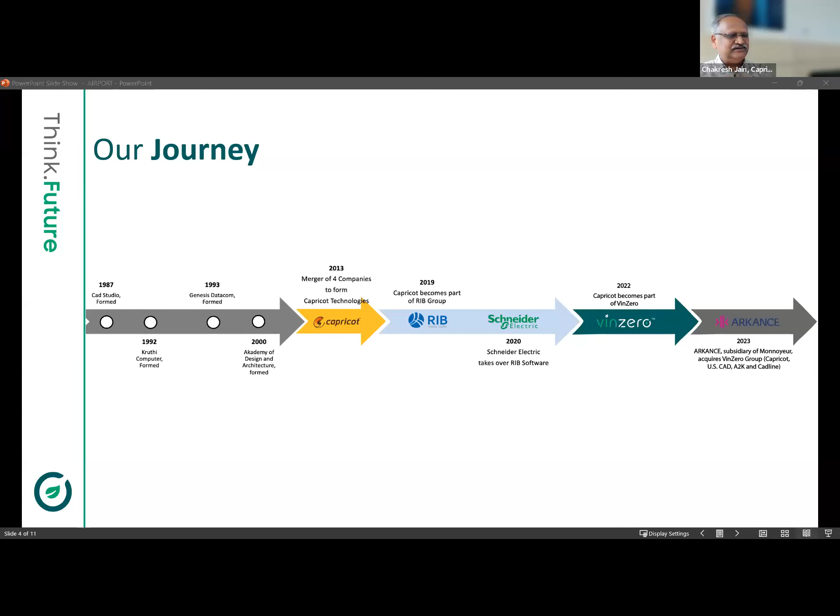But the fortunate thing has been that we have now become a part of a global group, ARKANCE, with presence in 18 countries across the world, serving customers like yourself with Autodesk technology with a very specific focus on the architecture and construction industry. So today, as an organization, we have reorganized ourselves into three separate geographical locations: Americas, EMEA, and APAC, to serve you better. Farhad, if we can go to the next slide.

As an organization, of course, we know today digitization is something very critical for this entire construction industry, and I'm sure our speakers will be talking about that in more detail. That's where our role and responsibility is, to help you use digitization and leverage it for improving your design and serving your customers better. That's our primary role today. Without getting into too much detail, just one more slide.

Today we are serving customers like yourself from 50 different locations across the world in 18 countries, with more than 40,000 customers. On the right side, you can see how we are organized. Monnoyeur, a French group, is the owner of all this organization, and under VinZero we are present. So we can claim ourselves to be one of the largest partners of Autodesk across the world; there are very few such organizations serving the construction industry. That's what we pride ourselves on.

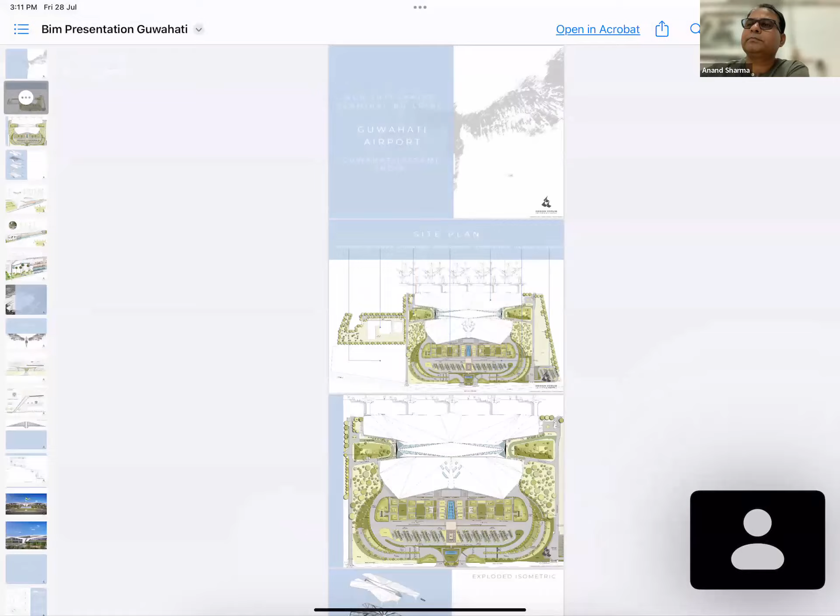I hope my screen is visible to everybody. Yes, sir. All right. So as architects, I'm no BIM specialist. Let me be upfront and very candid about it. I'm a user of BIM, and I would illustrate the kind of complexity that one can handle using BIM as a platform via a project of ours that we've been fortunate to be a part of.

You will pardon a little background noise around me because I had a whole day of site visits scheduled today, and I'm still sitting on a site while I'm doing this webinar. But Chakresh asked me to be a part of this webinar, and Chakresh is one of those people I cannot say no to. Other than being the stalwart in the industry that he is, he's also senior from my college. So of course, that special link is definitely there.

So I'm going to talk about the new integrated terminal building for Guwahati Airport in Assam, for which we were designers, architects in association with AECOM. I will quickly give you a flavor of the complexity involved in the design of the terminal building. And without showing you the drawings that get extracted from BIM, because you all are very experienced, I would take you through a small Navisworks walkthrough using the platform that we had created.

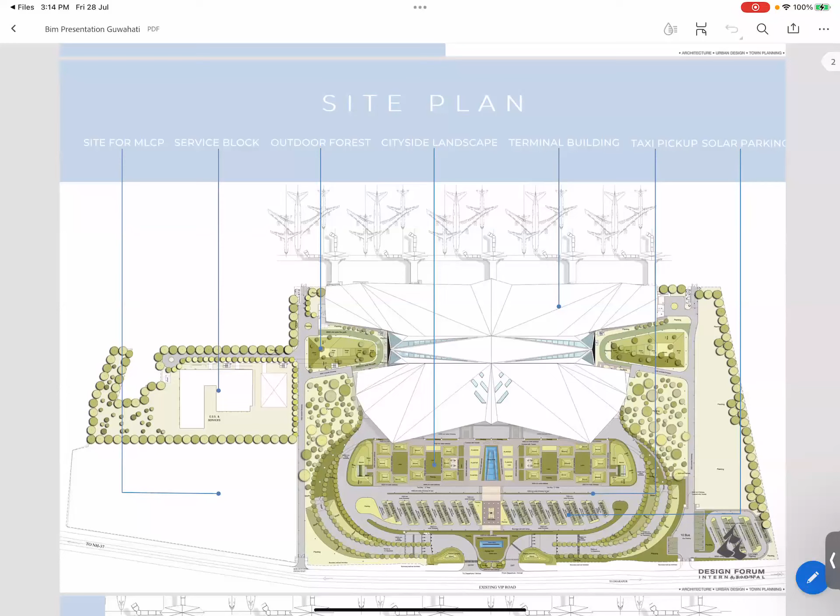There is a lot of intricate design intervention in the terminal building, all of which I will take you briefly through. In airport parlance, there is what we call the city side landscape, the terminal building and the air side. And there, of course, are the services and related paraphernalia, but we will primarily focus on the terminal building. The terminal building has a very unique origami-inspired terminal roof. You can see the bird's eye level plan of the terminal roof, and the landscape in front of it.

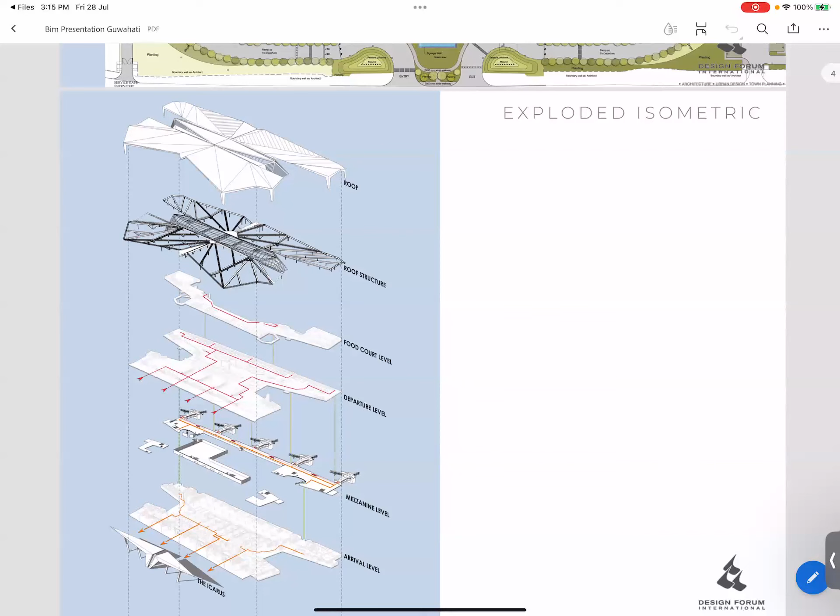If I was to explain the way the building has been modeled, there is an exploded isometric that you can see. There are 5 levels to the building. There is the arrival level, there is the mezzanine, which is primarily for passenger movement from airports down to arrival and so on. The departure level, and then there is a food court level on top of it, which is the 4th level. And the final and most complicated level is the roof structure that you'd see on level 5. And then, of course, the envelope of the roof over there.

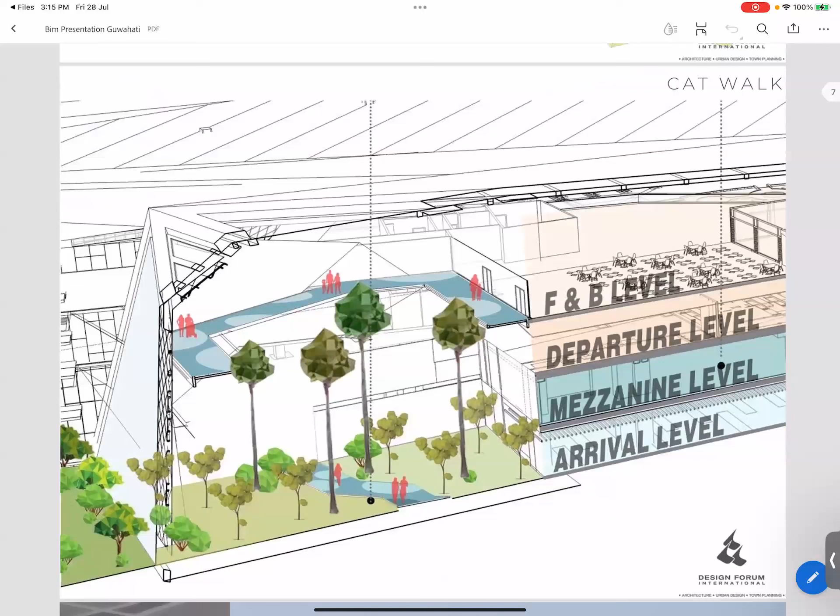So one clear design thought, or rather a chain of design that we were very, very conscious about weaving the entire design through, is origami. It is a craft that all of us have sort of practiced in our childhood. We use that craft to create many things in our building, including what we are calling the Icarus.

For the uninitiated, Icarus is the mythological Greek figure, the first person who had dared to fly using wings glued with wax to his body, and he jumped off a cliff. And the aspiration soared high. Unfortunately, the person did not, but at least the aspiration of soaring high was definitely there.

To give you a sense of Icarus, it is 180 meters long and can take almost 13 full-length buses, length to length. So it's a massive structure, as you can see, supported at just 4 levels. It's an engineering marvel all by itself. It rises 26.5 meters from the ground, and it spans primarily over the departure concourse, and you can see the canopy spreading over the departure concourse.

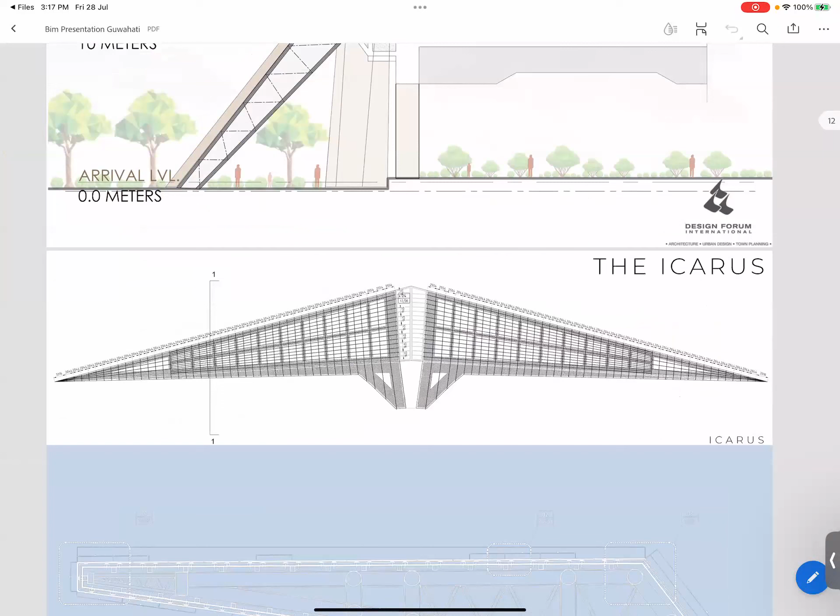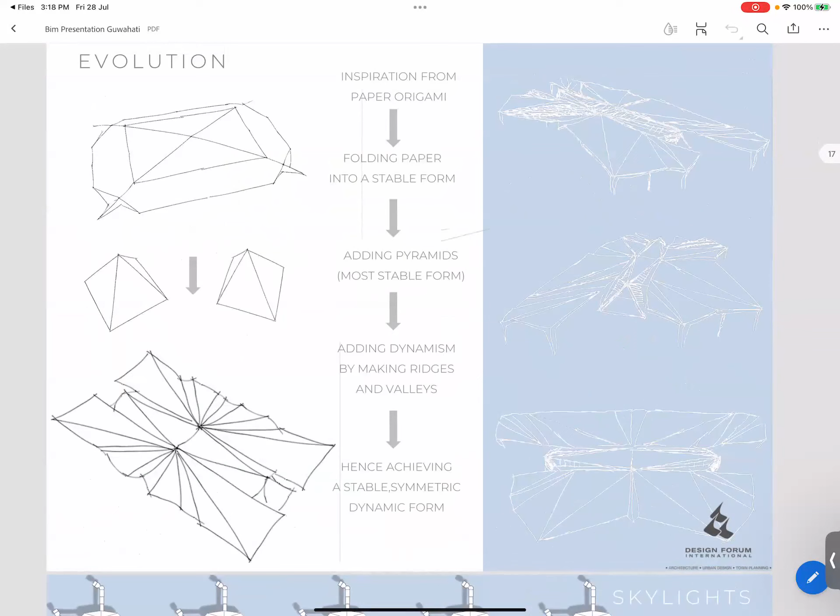The origami roof. So we started off with creating a plain rectangle and trying to bring some corners to it. We tried adding pyramids to the sides to bring stability to the form. And then we ended up having a little more fun, making ridges and valleys from the roof. And eventually the result is what it is. It's complicated, but it is also very, very symmetrical and very, very interesting.

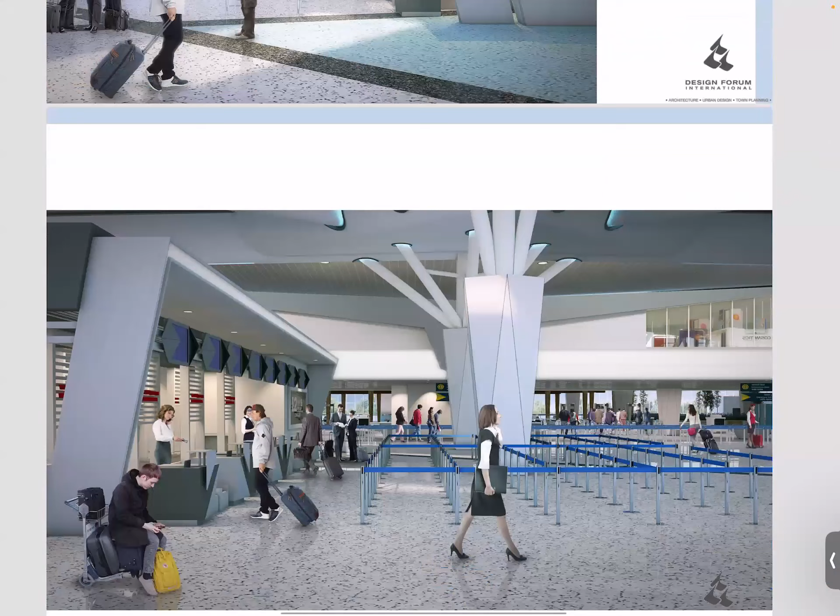The trusses: because of the complicated structure that we had, it was only possible using BIM to actually model the structural supports of this. You can see the complication of too many trusses coming into one diaphragm kind of a truss, like a plenum kind of a truss, and all the loads getting transferred onto it.

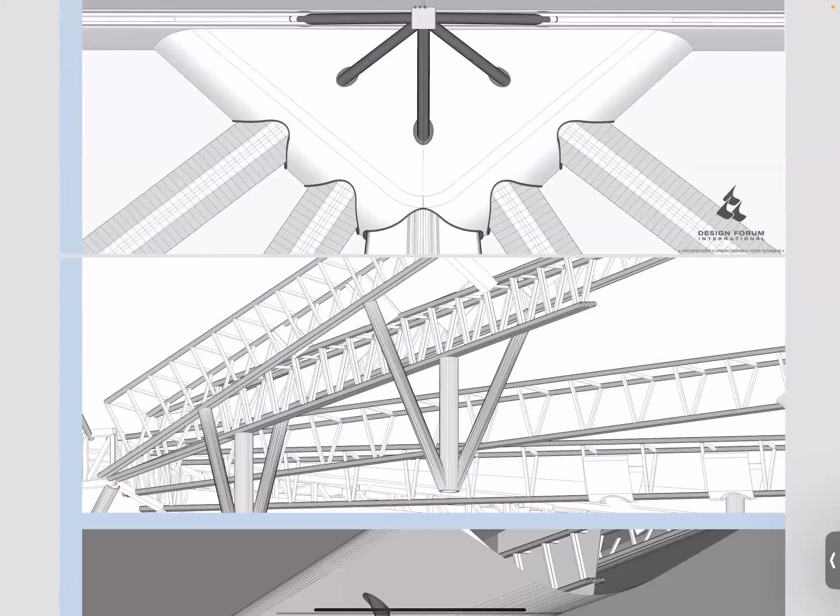And because we were modeling it all in BIM, we could actually work out the profile of the cladding that is eventually going to be put on top of these trusses, and determine the exact shapes, the exact curves, the exact curvature needed, and the length of the sheets to cover a complicated structure like that. And these two images, top and bottom, give you an idea of what the trusses are and how the trusses have been treated using a visualization and working drawings generation tool like BIM.

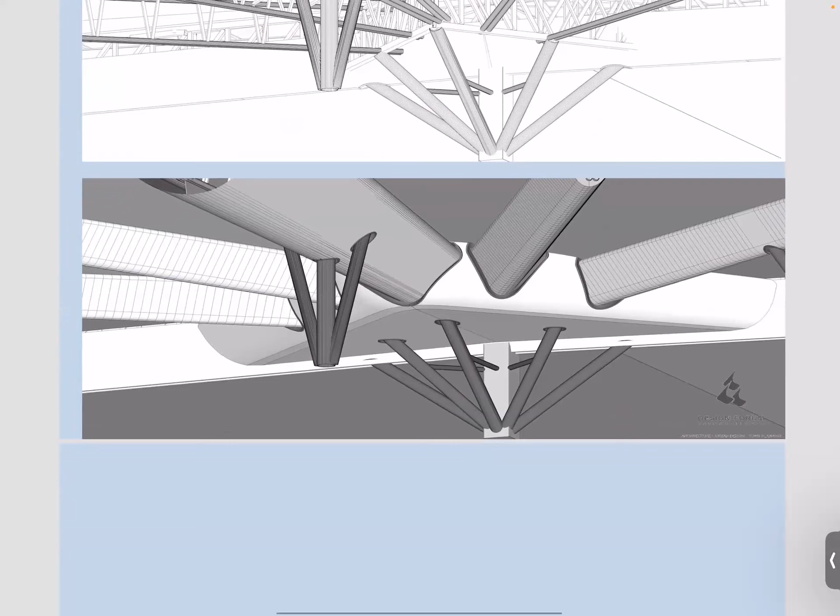Some more shots. And then there is the indoor forest that I was telling you about. It essentially is a transition point from the arrival atrium via an indoor forest onto the baggage collection. And it is located on the extreme sides of the terminal. It is a pyramid, and therefore to join a pyramid into a complicated roof like that meant a lot of intricacy and a lot of three-dimensional thinking. Of course, BIM made it easy for us.

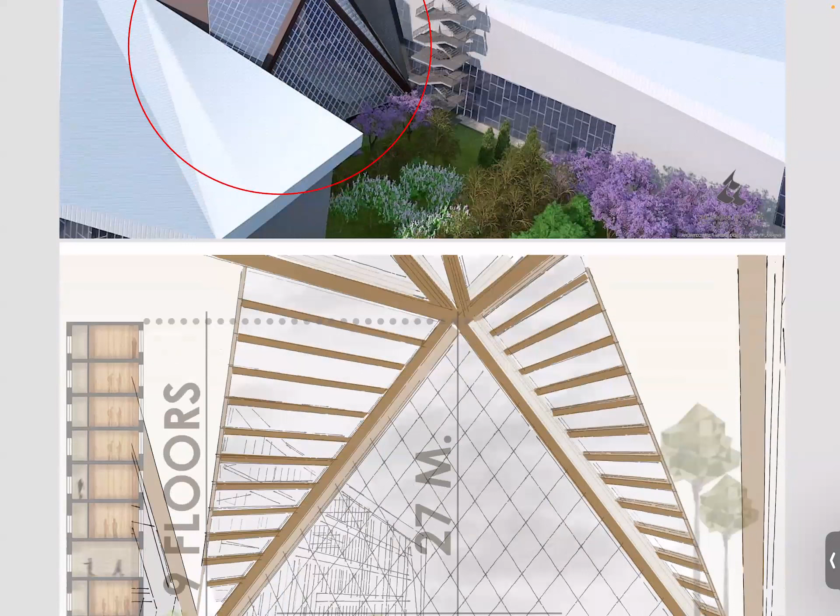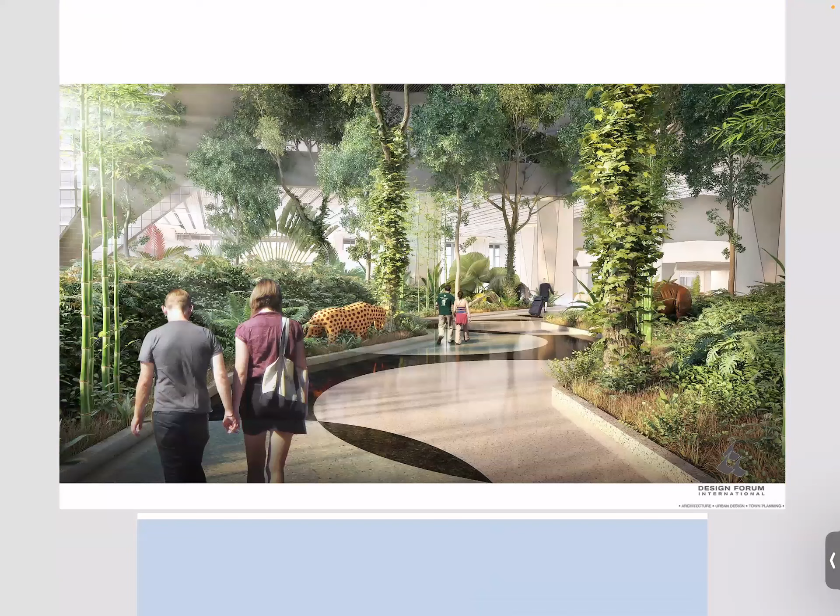Just to give you a sense, this arrival atrium, this indoor forest pyramid is 27 meters high, equivalent to roughly 9 floors. So you can see a massive glass-clad structure, and that is the internal impact of that pyramid that the passenger will experience walking through the indoor forest over here. We are actually planting shade-loving indoor plants, and because there is abundance of sunlight coming into this, the experience is very, very surreal.

I do not want to bore you taking you through the drawings that were extracted out of them. You guys are all stalwarts. You understand. It would be, I think, sufficient to say that all the GFCs that were issued to the contractors were derived and were extracted from the BIM model.

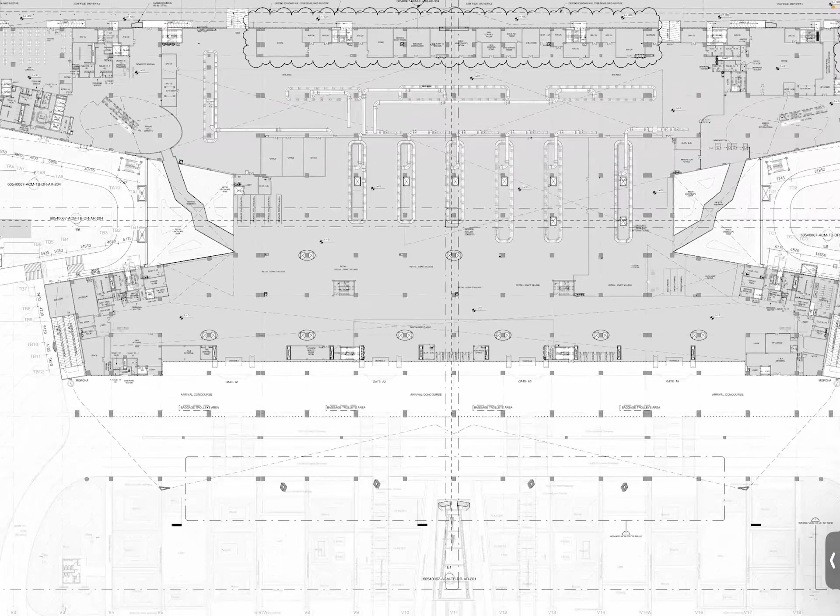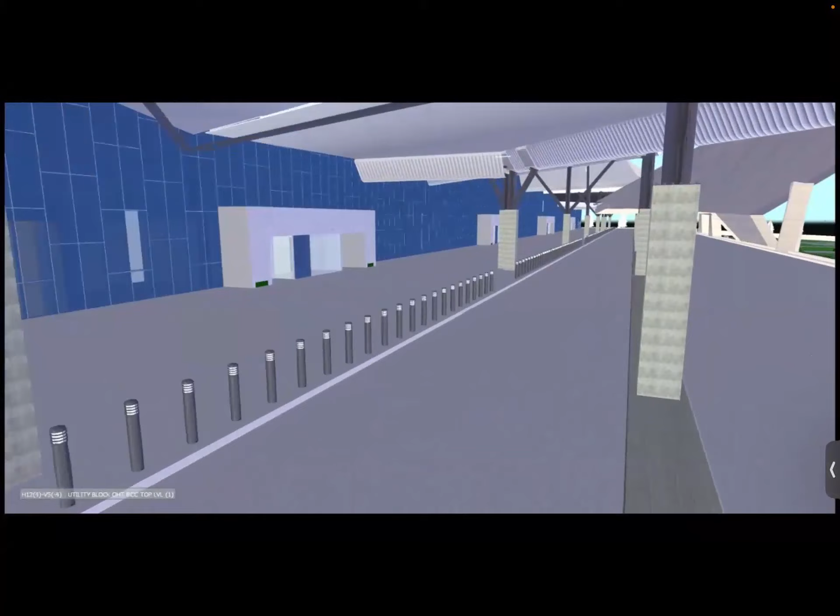Our client at that time, Airports Authority of India. The project has now incidentally moved on to Adani, but our client at that time, Airports Authority of India, insisted that GFCs were made out of BIM. So I will hang back there and walk you through that. So this is the entire model created, resolved through Navisworks in our consultation and in coordination with our project partners, AECOM. And it's a 4-minute video.

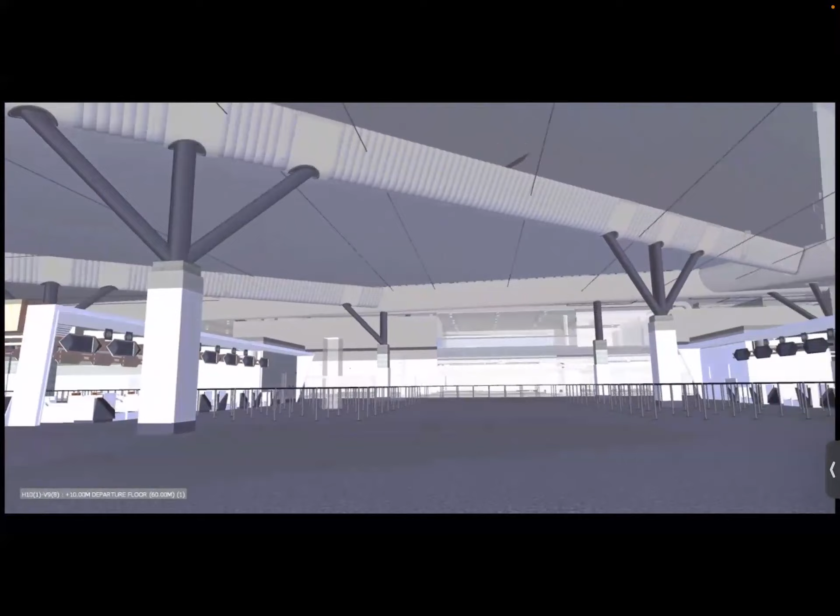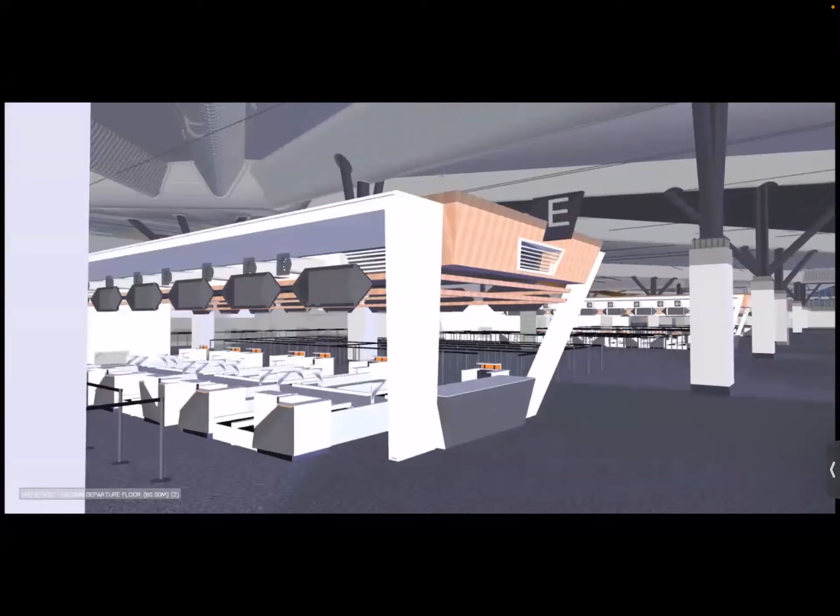Please bear with me. The intent is to show that all the finishing, the truss treatments, the interiors, the flooring, the wall treatments, even the baggage system that you will see in a moment, the check-in islands, the screens, every part of the facade, the design, the interiors, the systems, everything down to the last things such as queue managers, we modeled in BIM. It was possible to do it.

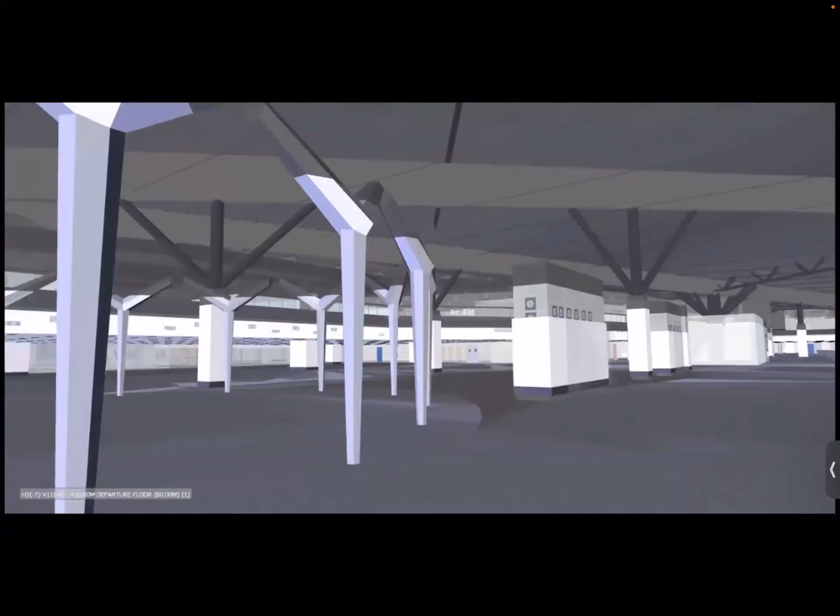It's an extremely complicated design, but it was possible, and we made sure that every single design, even the furniture, you can see the facade, the gates towards the airside for passenger boarding bridges. It was possible, and the versatility of the platform gave us the latitude and gave us the freedom to do it. This is the departure floor, as you can see. There is a crafts village that was envisaged as part of the secure building area for the airport. So this portion is all at the departure level at plus 10 meters.

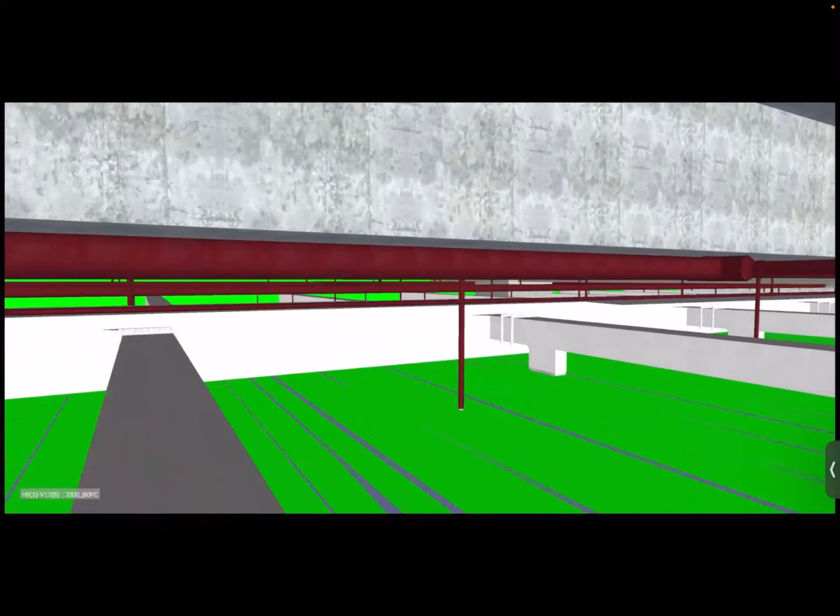We would quickly run to the food level and then to the arrival level. This is the arrival level. You can see the baggage reclaim devices, the false ceiling, the baggage reclaim hall, the baggage collection hall, the services running on top of it, the structural system, the sprinklers, the upright and pendant, the ventilation system, even the false ceiling system is very, very visible. We would also take you through the baggage handling area, and you will see that the versatility of the platform afforded us the chance to be able to do all that.

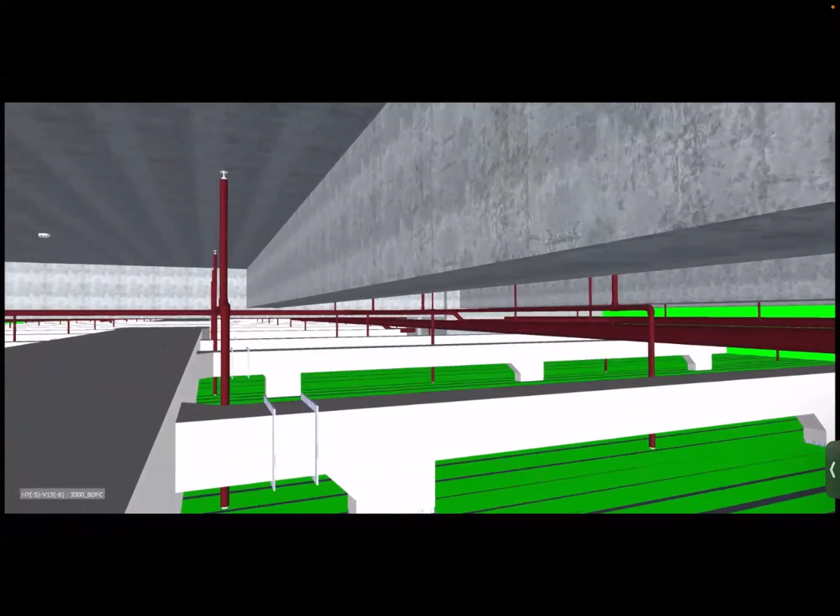So these are the areas where the baggage is coming from the level above. This is the mezzanine back of the house area. Nobody ever sees this area. This is where the baggage is coming from the check-in islands to a level where all security checks are happening. There are huge luggage conveyor belts. There are CTX machines through which baggage passes. So inline baggage screening system, as they call it in aviation terminology these days, is what happens behind the scenes.

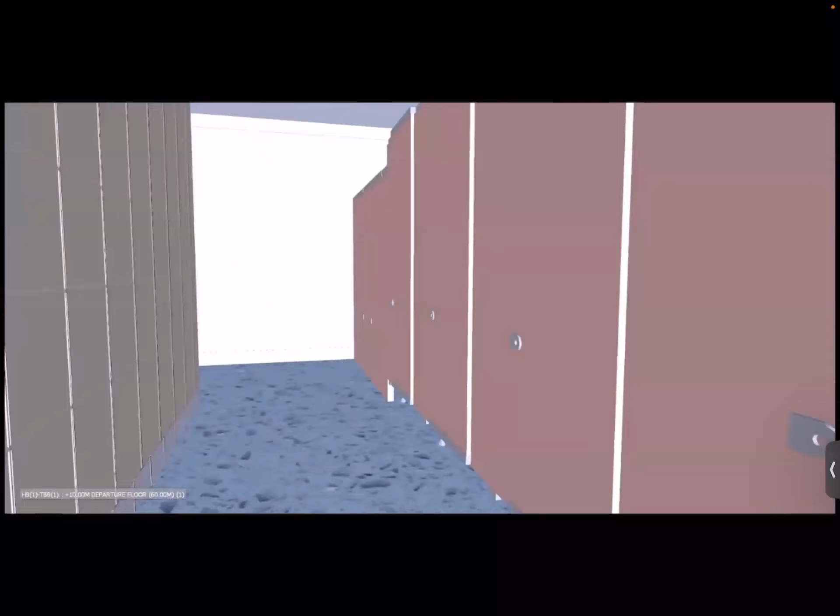Then there are sections running through toilets and plumbing shafts and everything. The power of the platform, down to being able to detail the unions, down to detailing the diameters of the pipes, coordination of the shafts, overlaying of various services within the shafts. It was all possible, and we went down to that detail. You can see even each and every bend, each and every union has been captured. All the P-traps, the S-traps, all the plumbing system.

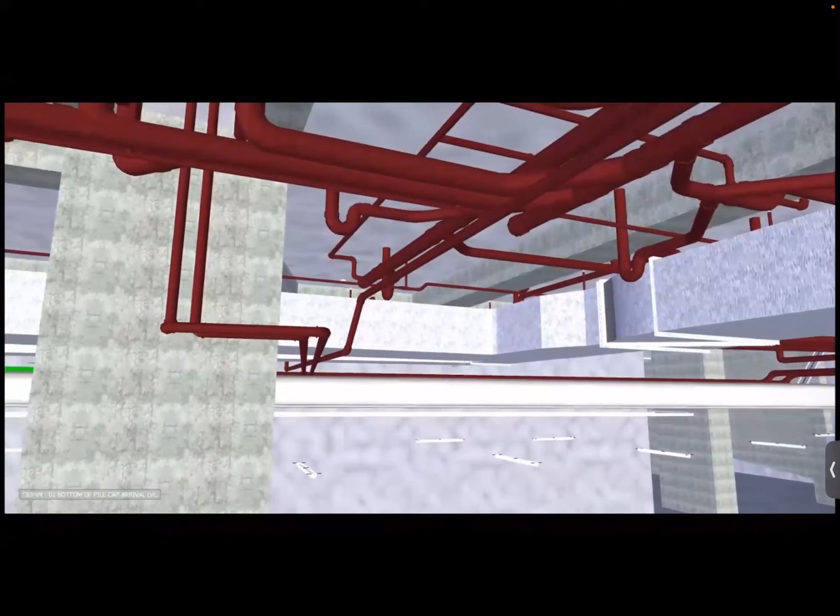Baggage handling system, incidentally, is the most complicated services part of an airport. And if it was possible to model that, everything else was, so even the piles, the structure. This is the structure getting cut sectionally from back towards the rear, and you can see all the components of the building getting very, very clearly reflected in this animation and this video. So it was conceptualized and then eventually delivered in BIM. So that's about it.

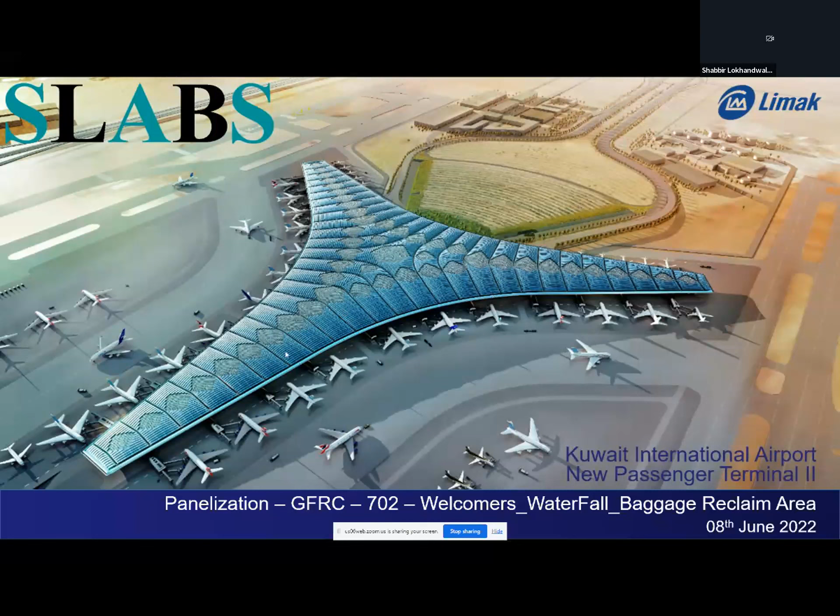Roughly to tell you, the entire project is about a $10 billion project located in the heart of Kuwait. It's one of the largest ongoing projects in the Middle East right now. The size of Kuwait International Airport is roughly 38 square kilometers. That's the entire scale of the project. What I would like to showcase to you is one part as a case study of this entire project and how we resolved it using BIM.

So, as I think our previous speakers have told, there's several areas in the airport like welcomers area, baggage reclaim area, etc. So, in one of the areas, let's say welcomers area, we had doubly curvature panels. So these were all parametrically modeled, and the meshing and massing was done, also to make the panels production friendly, erection friendly, and so on.

So without BIM in place, this would have not been possible if we would have considered the traditional approach of construction. Along with this, we had to do integration with services like sprinkler, alarm system, HVAC, and other services, and do the clash detection as well using Navisworks software. So all these were enabled using only the BIM platform.

And I would say that more than 100 agencies were working across the globe to develop this entire BIM model for the entire airport. Some agencies were working on HVAC, fire alarm, some were working on the glass cladding, some were working on the actual structure. Arup was the principal structural consultant. So there were multiple agencies working on this project since 2017 till date. And till now also the project model is being uploaded and rigorously done.

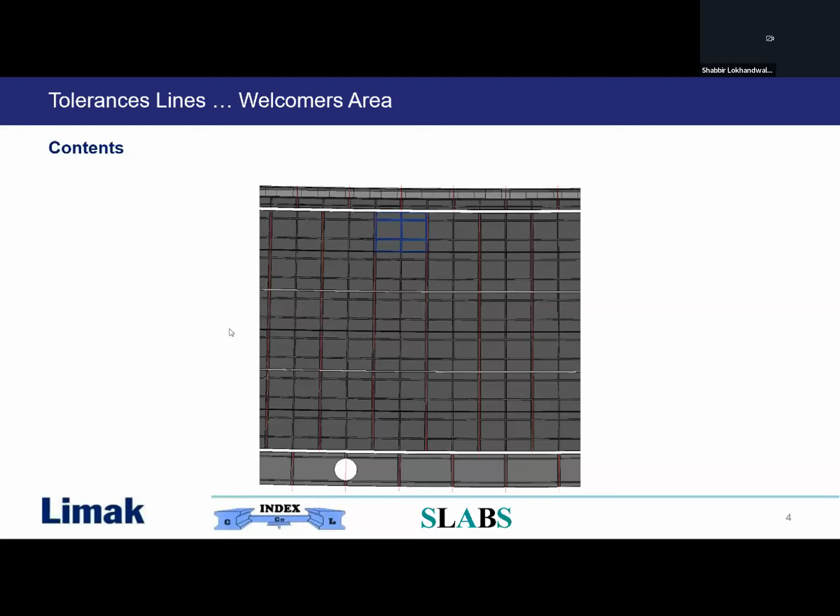So this is the scale of the project which could also be done in BIM, and this is completely done using BIM. So this is how the section looked like, and we had to ensure we maintain the gaps between the panels to align the services, etc. There was not even plus or minus 2 margin we had to play with the construction tolerances and the design tolerances, so that the panels could actually fit in the exact locations once they're constructed.

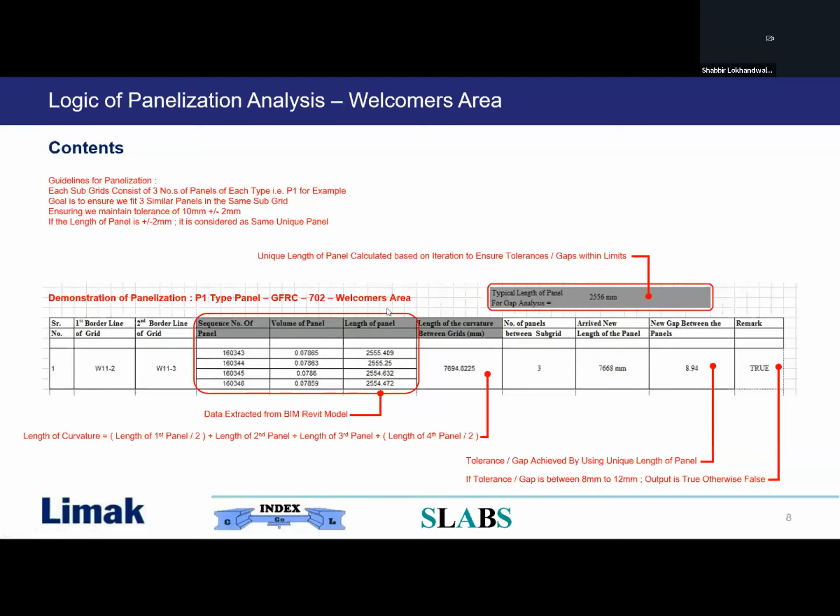Then we did the structural engineering analysis and design based on the spanning, etc. Then we had to do some sequencing, panel numbering, the analysis of the panels. So all the core data was extracted from the BIM model, and for one such area, this is how we arrived at the pattern of the panels, the way we'll hang the panels, how we'll increase the repeatability of the panels, how it'll look, because this is a main attraction at the arrivals gate when people are entering the airport. It's called the welcomers area. So this is how the entire summary of that area was done.

And then based on our design of panels, the secondary steel structure was also defined to hang these panels. The secondary steel structure was again hanging on the primary structure to cater the loads of these panels in GFRC and precast the way we had designed.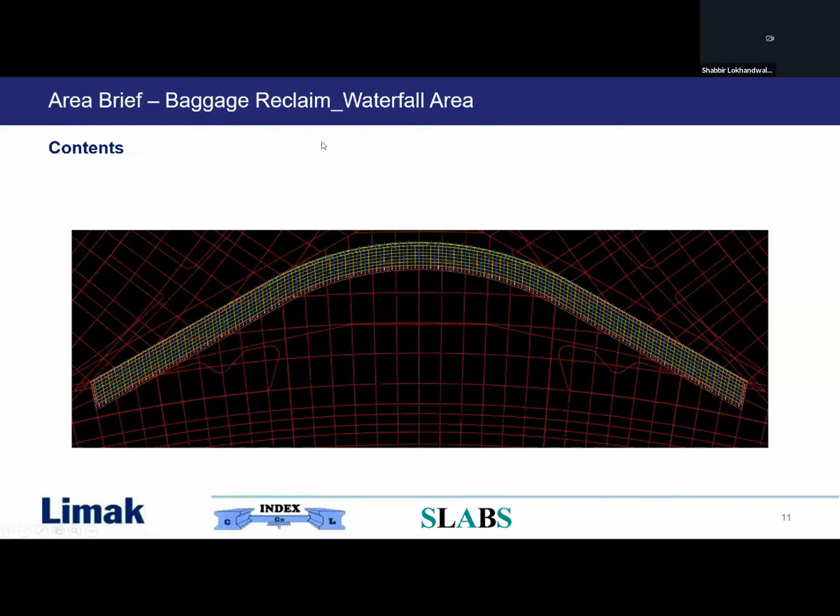So here also we have to define the gaps to be followed to allow the services, light fixtures in between, etc. And there was a particular line or groove which had to be considered, the architect's vision. Fosters and Partners were the architects, and we had to get the approvals in order to get it finalized, the way we are breaking the panels, how it will look like, etc.

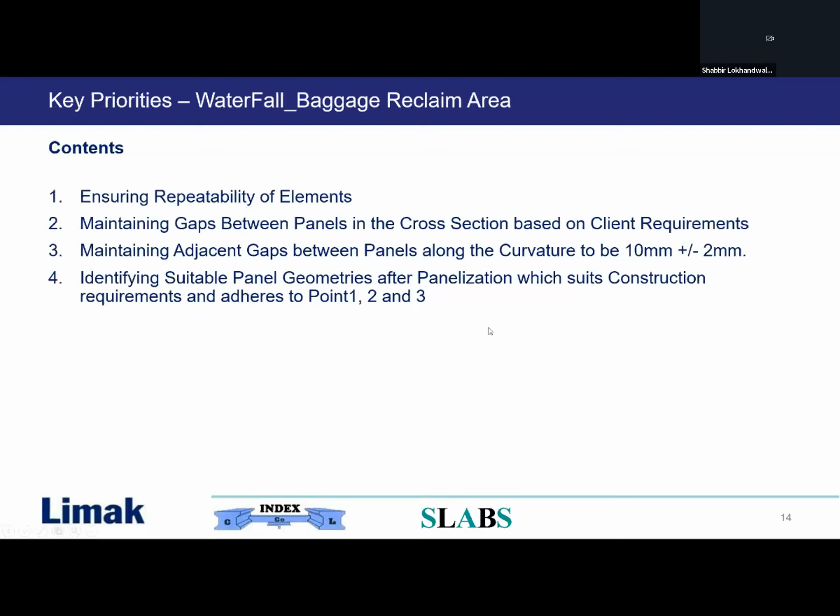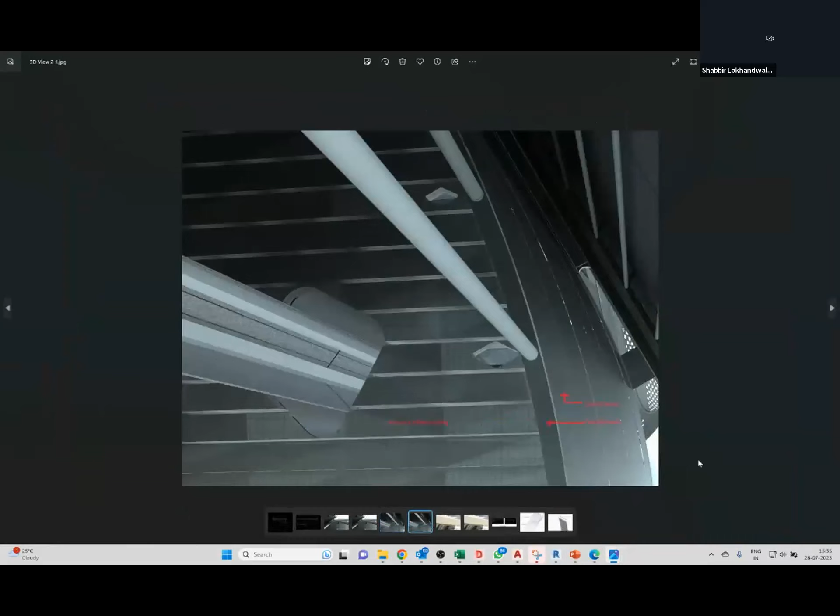Now, I would like to just showcase you the real outputs. So these are some of the 3D views which we have captured using Navisworks, once we superimposed our models and did the review of how the grooves will come, along with the other services and stuff like that. These are some of the views from Navisworks, just to understand from the bottom how the panels will look like, how the grooves will look like, etc. So this allowed the architects to understand with clarity how the final desired vision would look like.

Okay, fine. Now I would just like to show you some of the output results also, so that you appreciate the integration of BIM on a given project. So once we have generated a 3D model, there were more than 25,000 panels, and more than 2,000 drawings to be extracted. So it's a humongous amount of task.

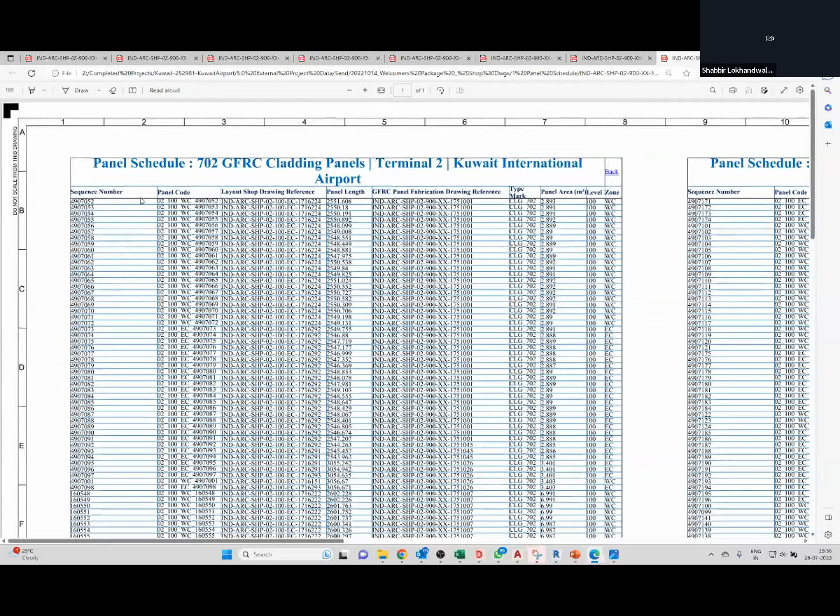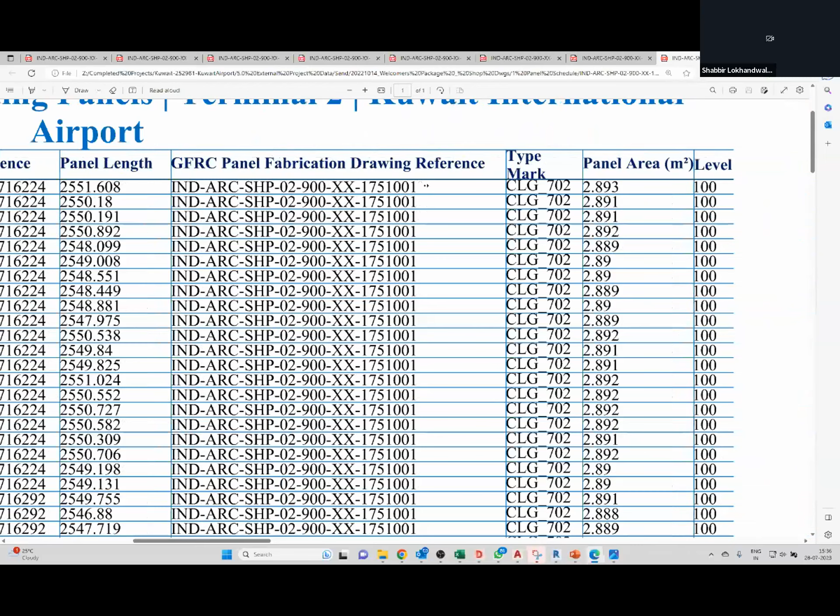You can see the panel schedule, wherein we have a particular unique ID number given to a panel in the BIM model. Then we generate a particular drawing, and then it is automatically programmed in Revit, which tells the production team to refer to this drawing to produce that panel, mentioning its exact length, which fabrication drawing to refer to, which erection drawing to refer to, the panel area and the zone in which that panel is coming, etc.

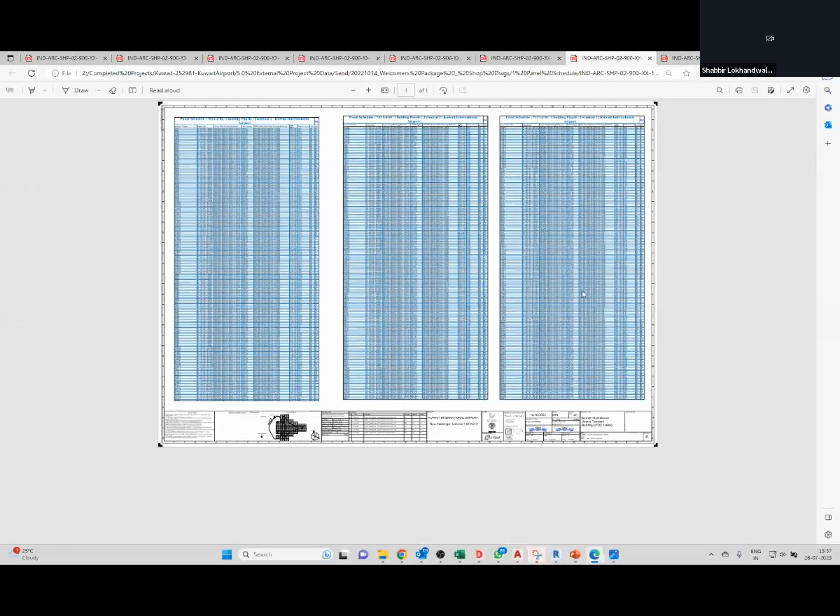You can see the panel schedule, which is entirely derived from Revit, from the BIM model. So this is one such fine example. So I'm just taking you in the backward direction. This is the entire panel schedule obtained from our BIM model in Revit.

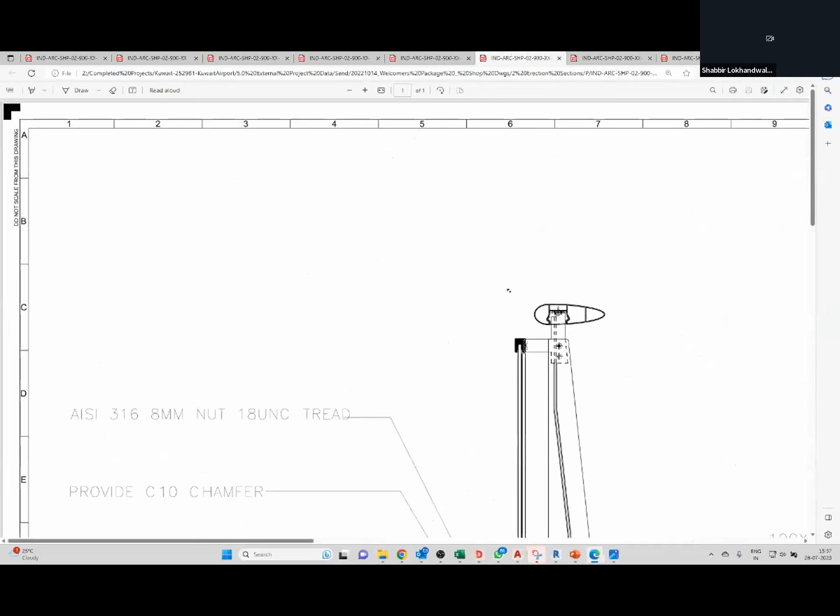Then these are some sections, connection details of the GFRC panels and how to maintain the gaps for the services. These are ribs and returns with the chamfers, with the secondary support, with the primary support. Then we had some balustrades, how to treat those local joints, etc. This is completely done by coordinating with other services and structural models to arrive at the entire BIM model of cladding.

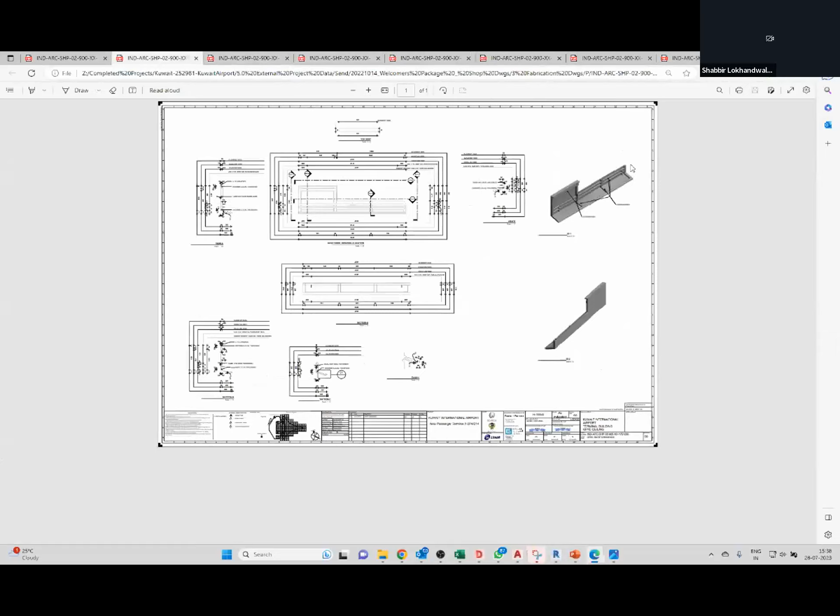There's a full section of the panels with connecting frames, primary, secondary, etc. So these drawings are also extracted from the BIM model. Another typical connection detail of other junctions. Then this is a shop drawing. Now for every panel we have to produce a drawing so that it goes to the production team and then it is erected.

So with detailed connections modeled into the panel with the ribs, returns, cutouts, and the exact panel dimensions. Please note that we cannot deviate more than plus or minus 2 mm at the production level. Okay, so that precise. The panels were actually extracted from the Revit model and the drawings were also created using Revit only. So nothing was done on a 2D platform like AutoCAD. Everything was seamlessly modeled, generated, clash detections done, and the drawings were extracted.

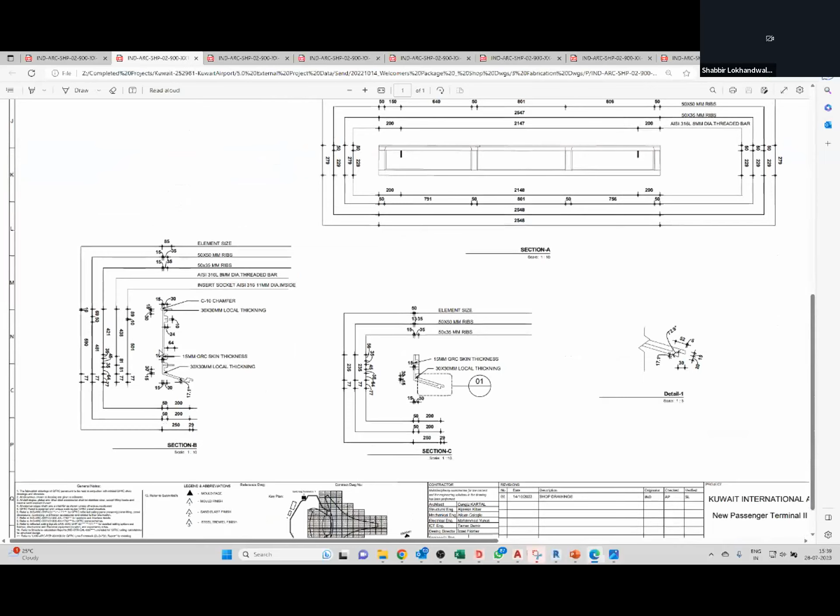Definitely for FEM analysis, etc., and parametric modeling, we have used other programming tools and software as well. And so these are finer level details, up to the fabrication level drawings, which we have extracted from Revit. Okay, so this is another complex panel which I'm showing to you right now. So you can see the connecting bars, threaded bars coming out of the panel, everything modeled into the model and drawings being extracted. Okay, so just a minute.

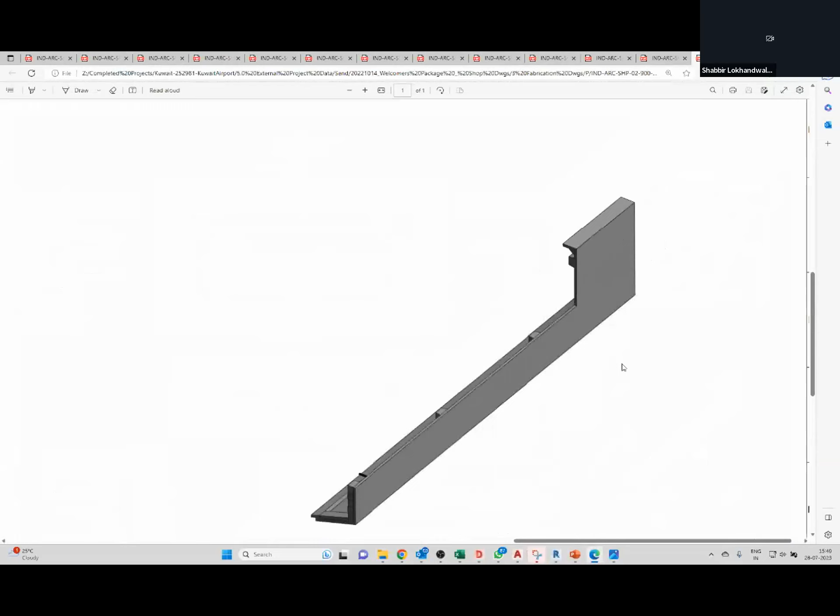So these 3D views also make very clear to the production team how the shape of the panel would look. Unlike 2D, where they have to visualize how the panel will come out in 3D, once we give a 3D view in the shop drawing, it's very easy for them to follow the drawings and make fewer mistakes. So that's the power of BIM, which we got to utilize for this particular project.

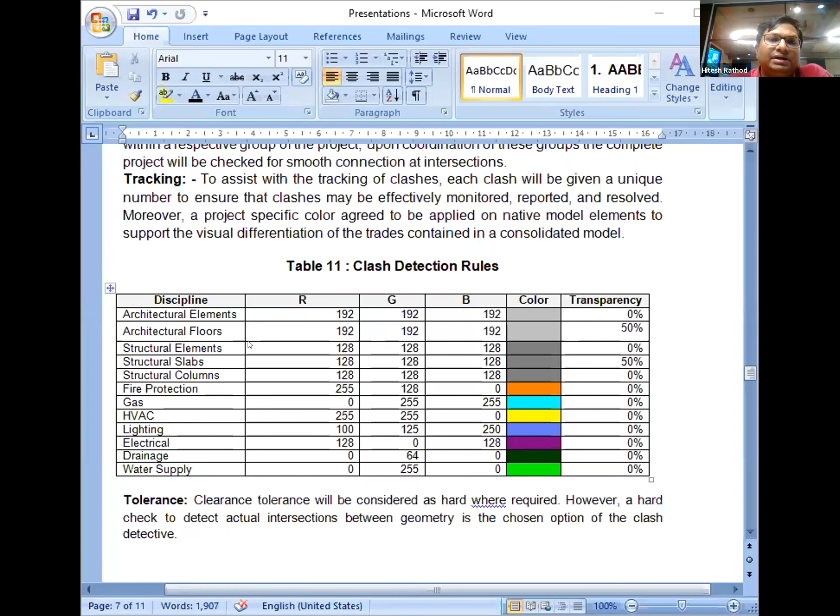Okay, so actually I have developed in-house clash detection rules and tolerances. So for architectural elements and floors, structure elements, slab, columns, fire protection, whether it is going to be wet utility or dry utility, lighting, drainage, or water supplies, we can develop rules as per this table, and we can provide the transparency with the tolerance this way.

Wait for a second. What is happening?

What is the clash detection coordination cycle? Along with the BIM meeting, there are various actions to be taken on a daily basis. The actual day and item will be confirmed, but the following cycle is intended to be followed. Mentioned tasks must be completed before the coordination meeting. So when you have the meeting with the client, your clash report for your model needs to be ready. So these are the points that you need to take care of.

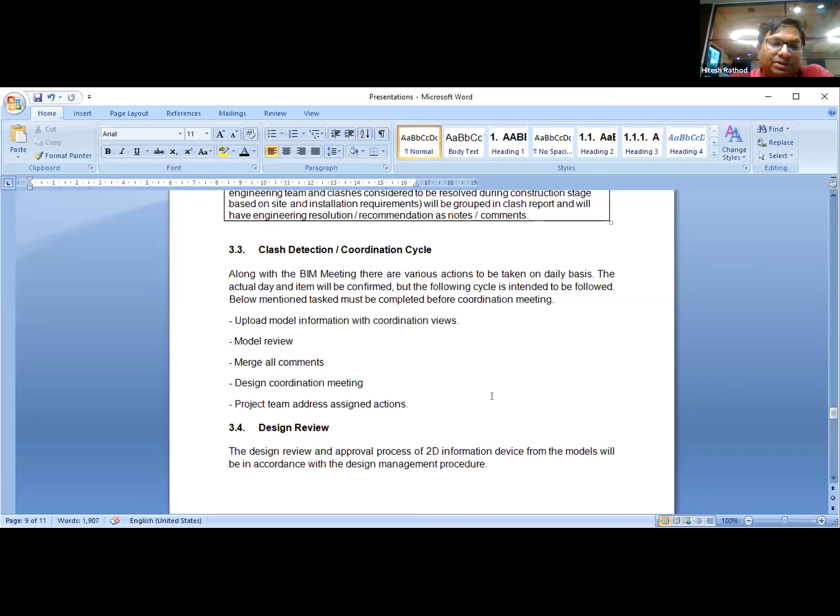And now we will come to the 3D takeoff model. So when executing a quantity takeoff from 2D designs, there are a lot of fundamental formulas and methodologies you can deploy. These include computing unit counts and determining the required linear length, surface area, weight, and cubic volume of the materials. The object is to turn two-dimensional design into three-dimensional concepts. This aids in understanding what the project's real-life physical requirements are from the 2D drawing.

A BIM model, on the other hand, provides this info immediately, because it automatically includes the quantities. This is a significant advantage of adopting BIM over 2D design. Quantity takeoffs are essential for determining a project's material requirements. However, this finding supports other construction parameters such as cost and time for the 4D timeline.

Now I will show you a few projects we have developed, particularly for airports. Okay, so currently we are working on the project named Jabalpur Airport. Actually, I'm not part of that project, but we have designed that project internally, and we have developed it on a 100% BIM platform, and currently we are at the stage of LOD 350 level.

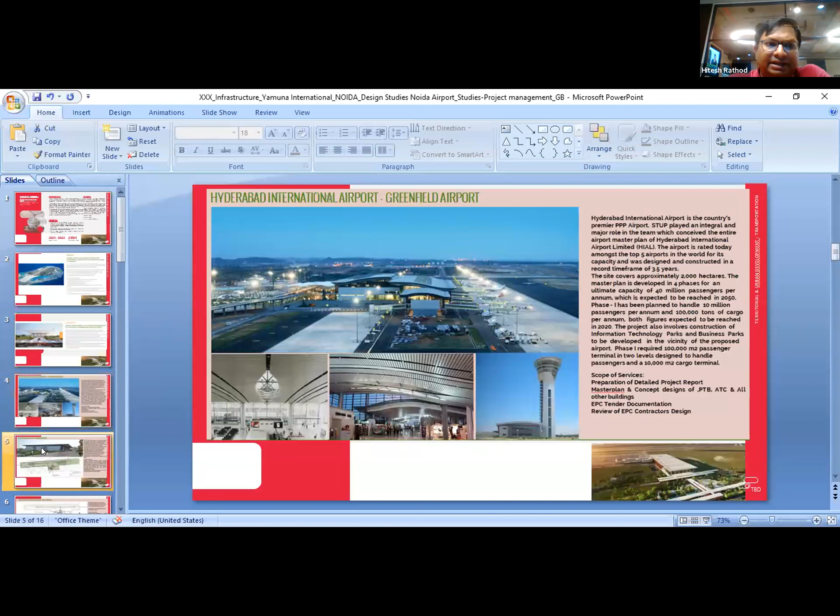This is the Maldives airport, which we are currently developing. The name of this airport is GAN Airport. This is the Noida airport, for which we developed the preliminary design with the master planning. This is the Hyderabad Greenfield Airport. We developed the master plan, concept design, and the air traffic control building, the ATC building. This is the Sindhudurg Airport in Maharashtra. We developed it on the BIM platform. The scope of the service was the same.

This is the Durgapur Airport in West Bengal. We developed it on the BIM platform. And this is the Benghazi Airport. We just designed it. And this is the passenger terminal building at Sebha Airport. The scope of the project was to develop this airport with all the disciplines. We have an in-house team for architecture, structure, mechanical, and plumbing, and we developed this project in-house.

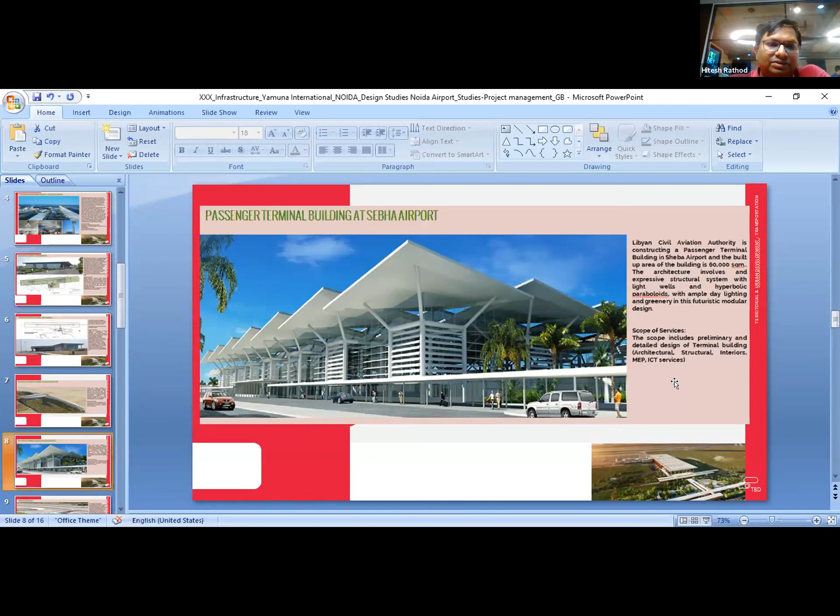Currently we are working on Jabalpur Airport. This is the visual our design team has developed, and we are working on it. The scope of service is going to be the same. Vijayawada Airport conceptual, we designed it here. And this is the Agatti Airport in Lakshadweep. And these are a few buildings.

We have developed buildings to support the surrounding area of the airport. So if you have any kind of aircraft hangar, any kind of cargo building to develop, or any kind of separate parking building, we have developed it 100% on the BIM platform.

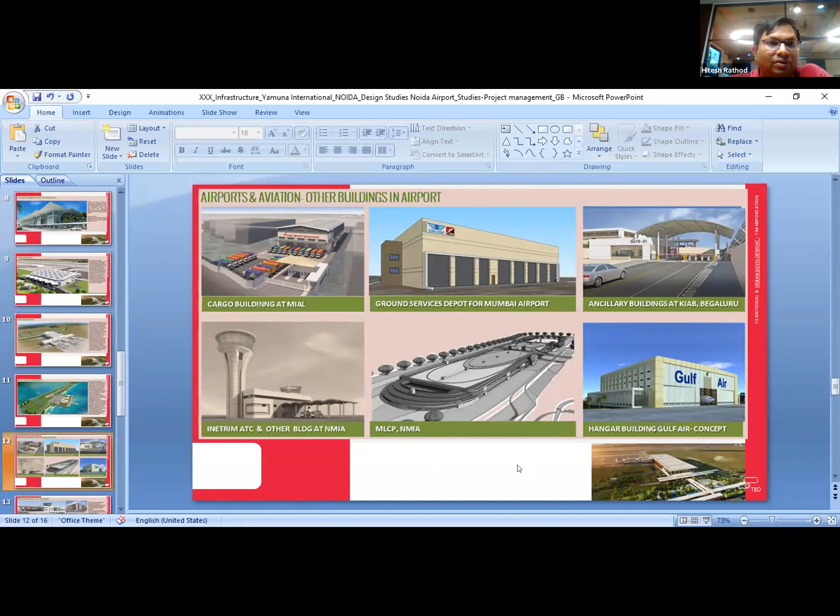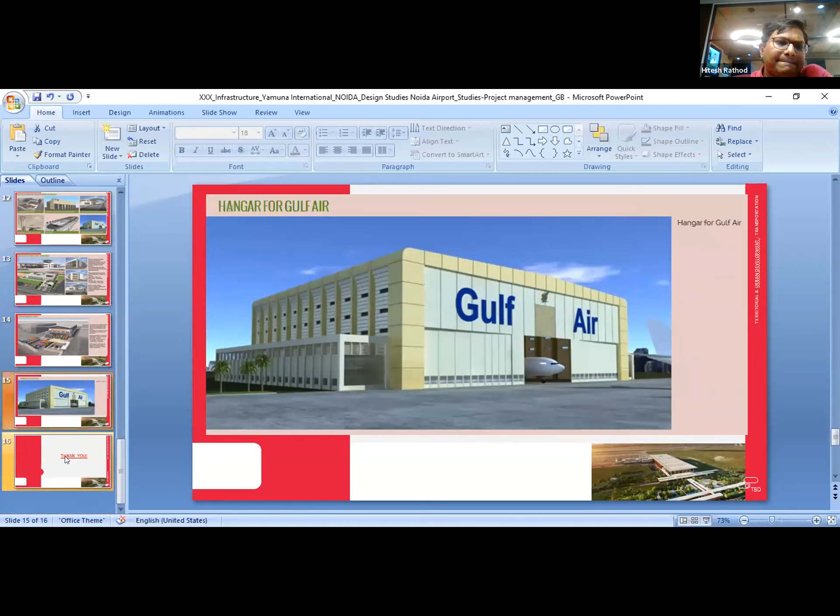And this is one of the facilities we developed attached to Bengaluru airport. This is also the Air India import cargo. We developed it 100% on the BIM platform. Yeah, and the aircraft hangar for Gulf Air. Thank you. Over to you, Bharat sir.

Yeah, hello, thank you, Hitesh sir. I think you are doing most of the airports in India. I can see a lot of airports, so that's good, and it's good to hear that you are doing that on BIM itself. Thanks a lot, and this further helps our attendees understand how important BIM and Revit are for buildings like airports.

Yeah, and I also want to share one project, a water treatment plant project that we are working on. Can you see my screen? No, I could only see the screen you were showing earlier. Okay, one second. Stop sharing. Okay, over here.

Okay, so this is a facility of 20 million liters per day. I will show you around how this facility would look. This is a Parshall flume. This is the chemical house. This is the clarifier.

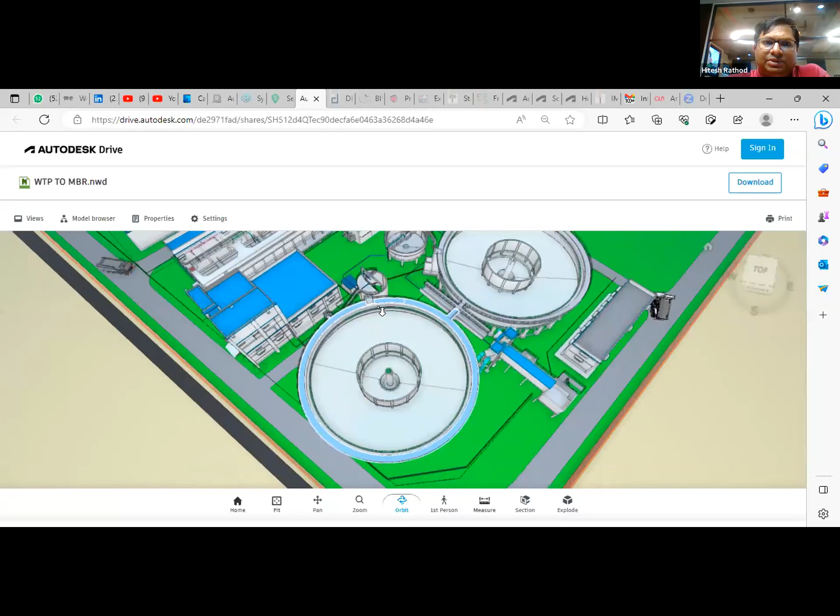This is our grit chamber. This is our chemical house that we have developed, and this is going to be our chlorination building, and this is going to be the large-scale 20 million liter per day tank, the capacity of this master balancing reservoir. And we developed it, and underneath that you can see the pile foundation. So there are lots of piles we have erected on site.

And over here, if you can see, this is the pump house we had developed, and these are a few workshops and a few admin buildings over there. So currently this model has reached LOD 300 to the 350 level, and we are currently working on it. Okay, thank you.

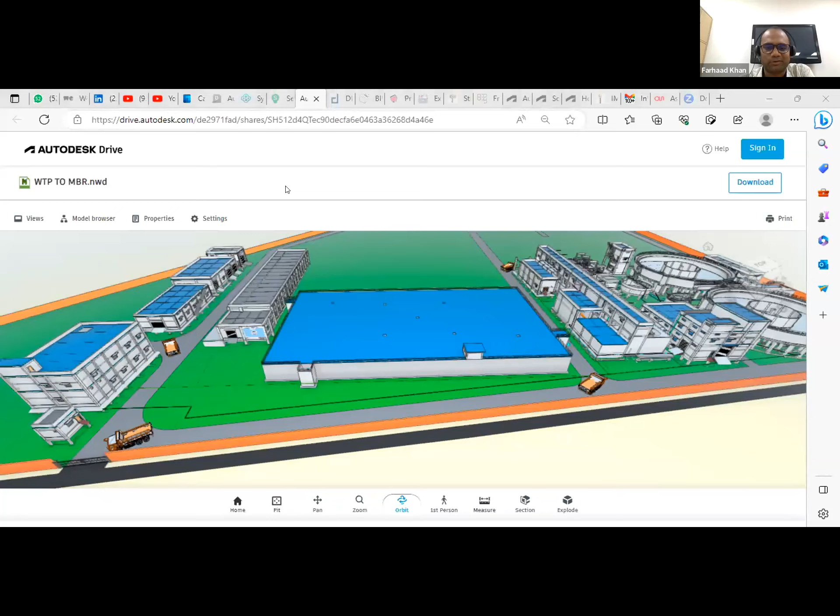Thank you, Hitesh ji. Wow, that is really surprising that even in water you're working on BIM. So that's a new thing for me also. So thanks a lot. So quickly, that was all our speakers.

But quickly now, there is one bonus presentation by me only. I just want to break some myths. So just bear with me for 5 more minutes. I'm going to show you a very small example of modeling complex roofs in Revit. So first of all, starting with computational design. What is computational design? It is human intelligence plus computer algorithm.

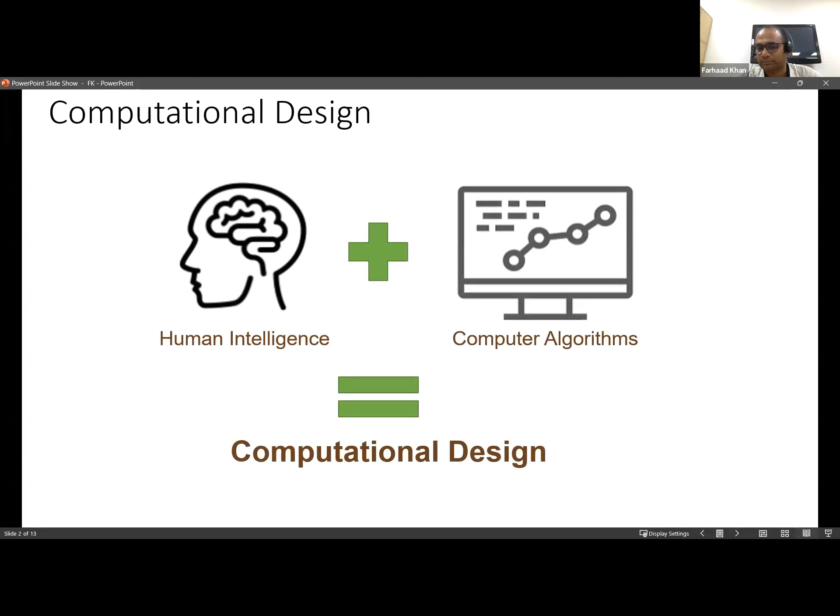So the myth is that complex designs cannot be modeled in Revit. We have seen quite a lot of examples of working drawings, clash detections and all detailing of big infrastructure building models done in Revit. But what about the initial part? A lot of people come to me and say, no, it cannot be done in Revit, we'll do it in Rhino, we'll do it using Grasshopper. But I'm going to quickly show you a very small example of how you do it with the help of Revit and Dynamo.

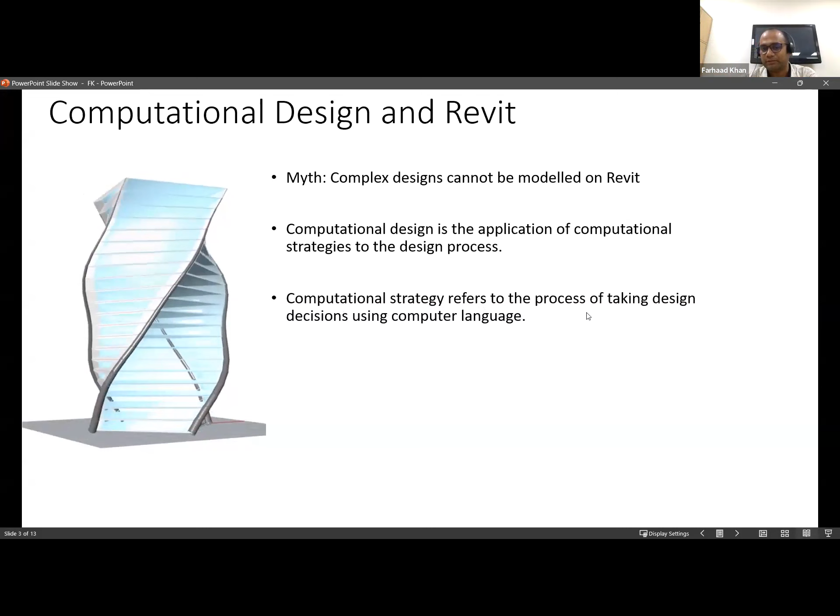So computational design is the application of computational strategies to the design process. And strategy refers to the process of taking design decisions using computer language. This approach helps the user combine logic, geometry, and calculation in a BIM model, providing the capacity to generate complex orders, forms, and structures.

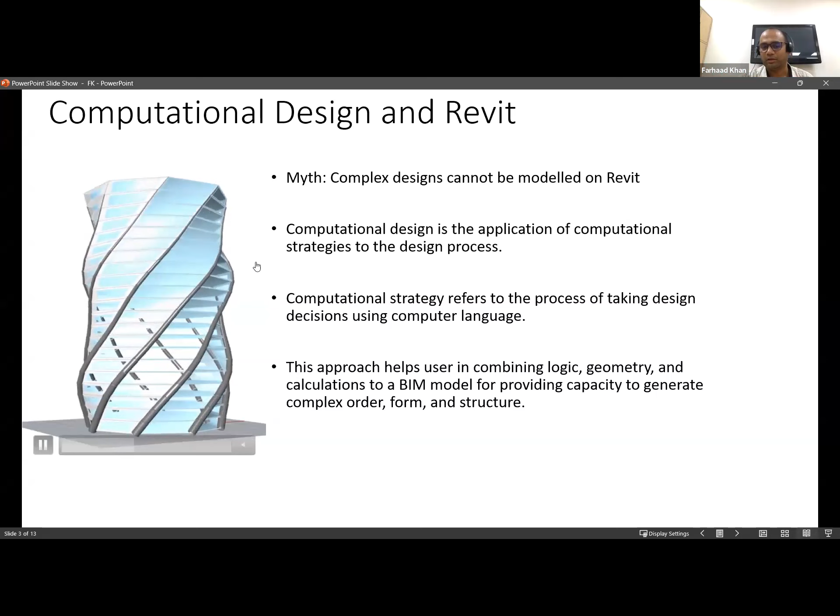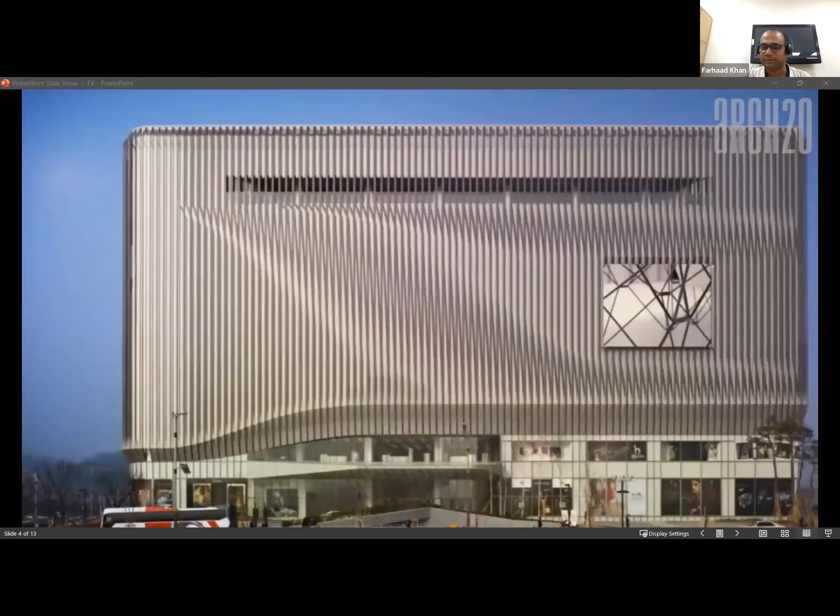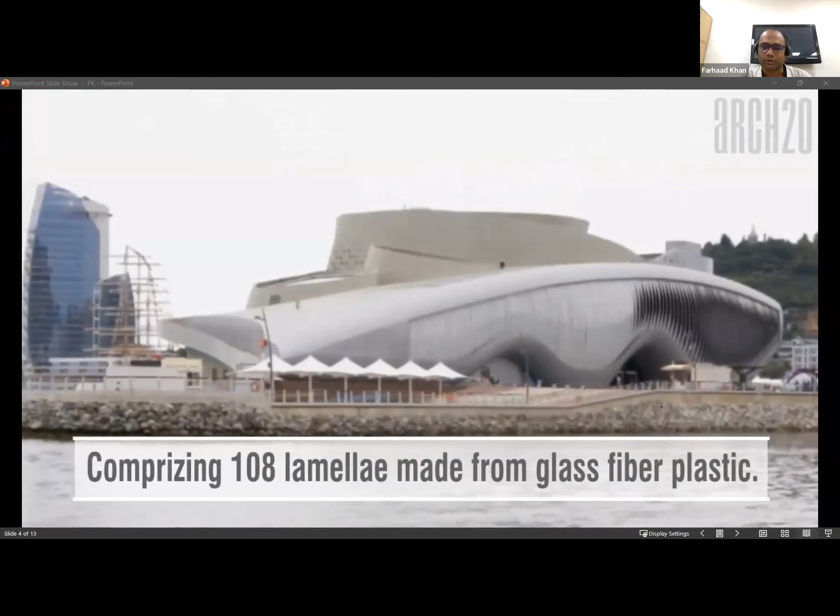And this example is the Galleria Centercity. You can see 2 layers of aluminum profile, an angled back layer. And this is the One Ocean kinetic facade, the largest adaptive structure ever built till now. So these were some examples. I've taken one live example also.

So you can write the answer in the Q&A box. I'm going to ask you one question. Can anyone tell me which airport this is? This is in India. This is the 3D view of one airport coming up, which has a very complex roof. So can anyone tell me?

Navi Mumbai International Airport? No, it's not Navi Mumbai. Noida International Airport? No. Mr. Ritesh is from Noida International Airport only, so he can say it's not Noida. Participants, attendees can just write in the Q&A box.

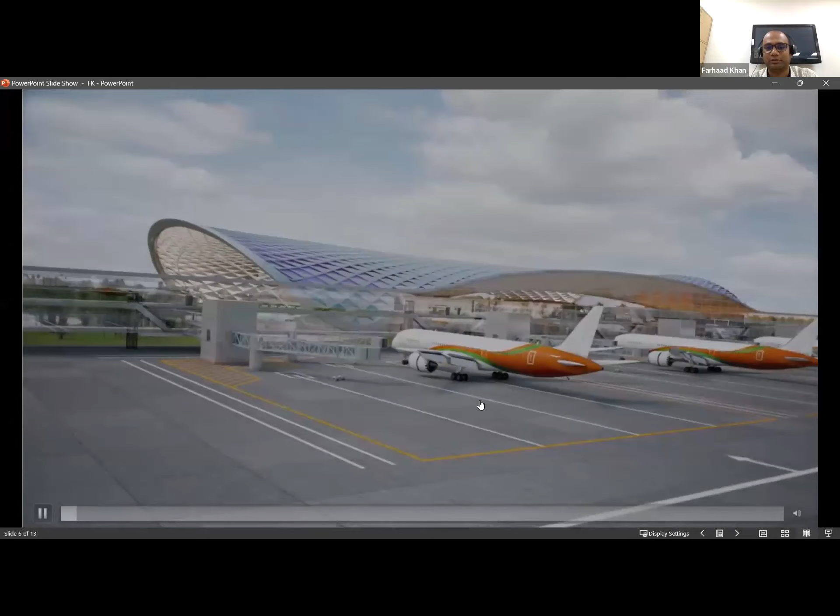So I'll show you one more 3D view. Look, this is from the side. I can see a lot of answers. A few people got it right. Pratima and Akansha have written Trichy Airport. Yes, this is Trichy Airport, in Tamil Nadu.

So now I'm going to show you how we are going to model this complex roof quickly in Revit. This is the Revit screen. Quickly, we are going to take the template. We are going to use the concept of adaptive families.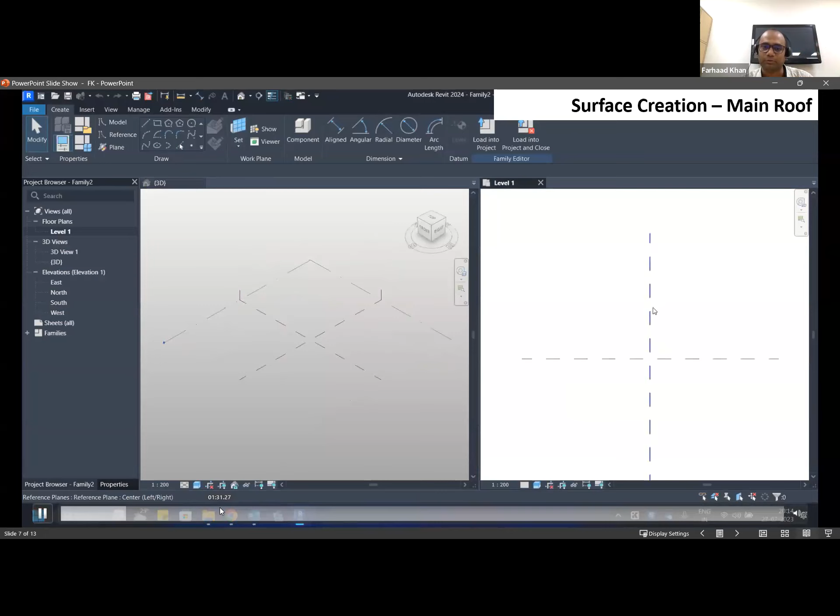So here this is the user interface. So there are adaptive points in Revit, point elements. So we are going to use that. So I had the plan. So the size of this roof is 270 meter by 144 meter. Okay. So quickly we are going to place the points. So these points are going to control the roof, and the more points we use, the more accurate the roof will become, the more curves it can have.

So we are going to pick this point element, and so we just place this and then quickly copy it. And so we have taken up 3 now. This is the one part, and now we can copy this. So point elements have the dynamic work planes also. So we quickly just will copy this. So obviously, as I mentioned, we can have more points and a more accurate roof. So now we have created one shape.

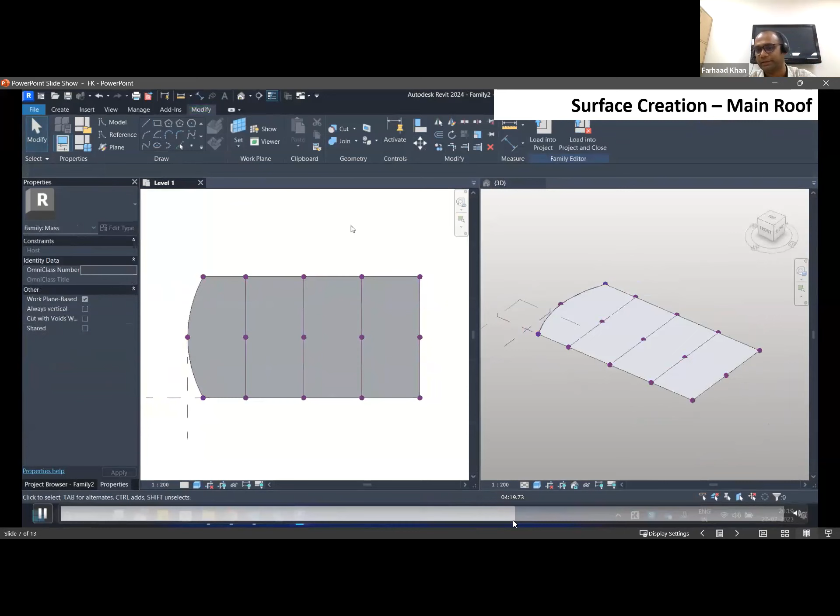Now we can play with the points. So we have joined these points with the spline, and we can play with the points, and we can create a very dynamic roof, which is kind of a prerequisite in an airport, because the airport building is very unique and it has to be good design. So we can pick up the point. You can see that you can play with the roof. So now on the edges, just stretch it.

So on both sides, we have the canopies. So next, I'll just show you how to make those canopies in Revit. So here 2 canopies, front and back, the canopies will come. So this is for the canopies. Quickly, I'll just move faster in the video.

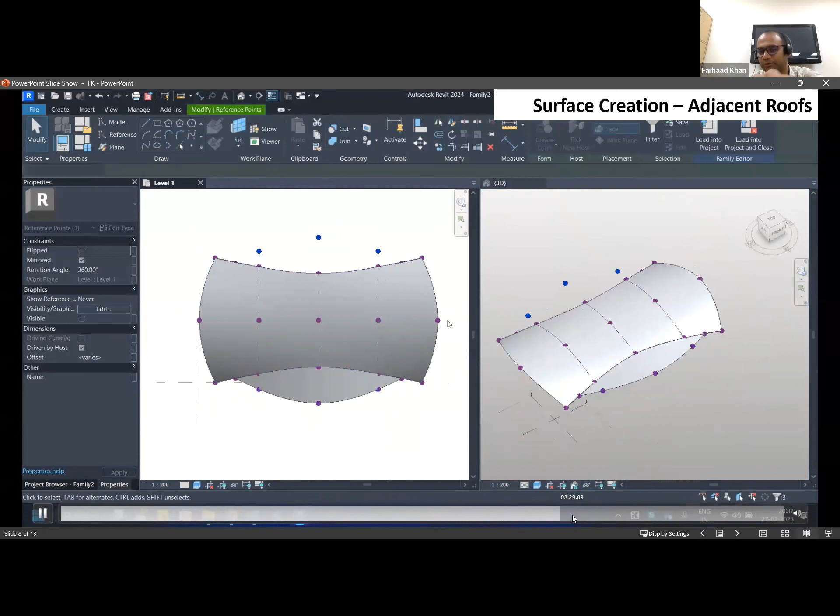Yeah, so we have taken the same points. We are going to have the canopy over on both the sides. So we have just copied the points, and quickly, we have attached, and we will just make this surface. And the front canopy has come up. So quickly we can just mirror the points. The back side, we can again make the surface, and we have canopy on both sides.

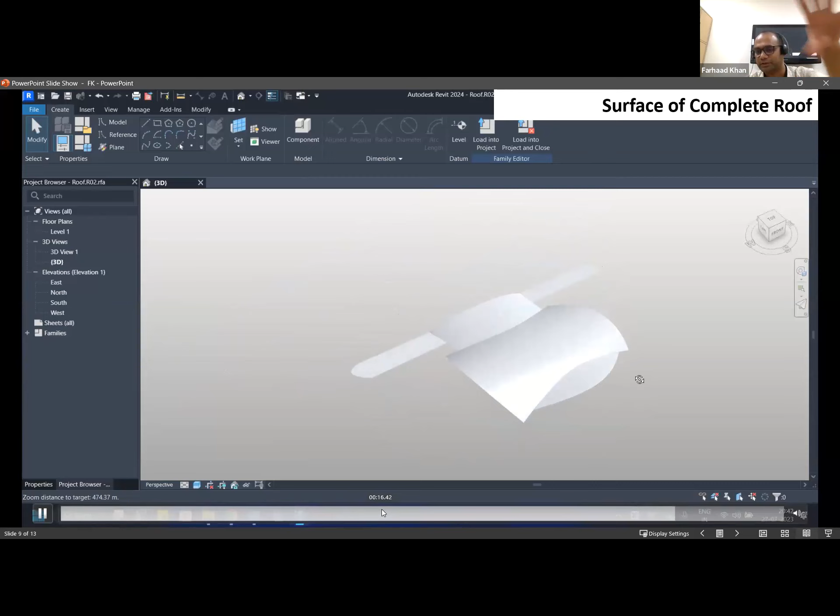So now, this is the backside where the planes are going to park. So with visibility graphics, I've removed those reference lines, splines, and you can see this is ready. Now the main thing in this Trichy Airport roof are the panels which are placed on the roof. So we are going to make one module and adapt it over the complete roof.

So first we are going to divide the surface. So we can quickly select horizontally and vertically what distance we should take and what shape we should take for the divisions. And quickly we can just divide. On the left side, you can see we can have fixed numbers, or we can have the size. So we can have different patterns also in this. So I've changed the pattern. So we can have some more patterns, honeycomb, cross patterns. In the canopy also we can have a different pattern because it's a different surface.

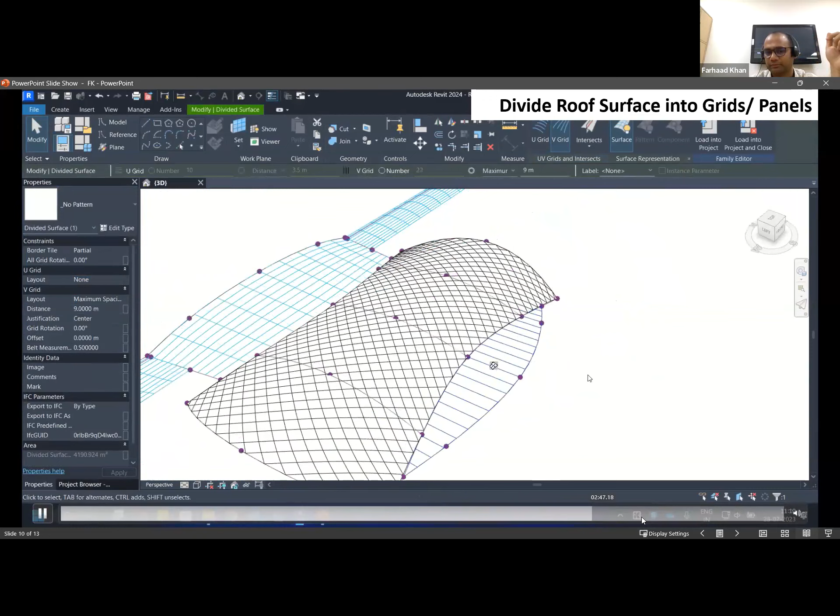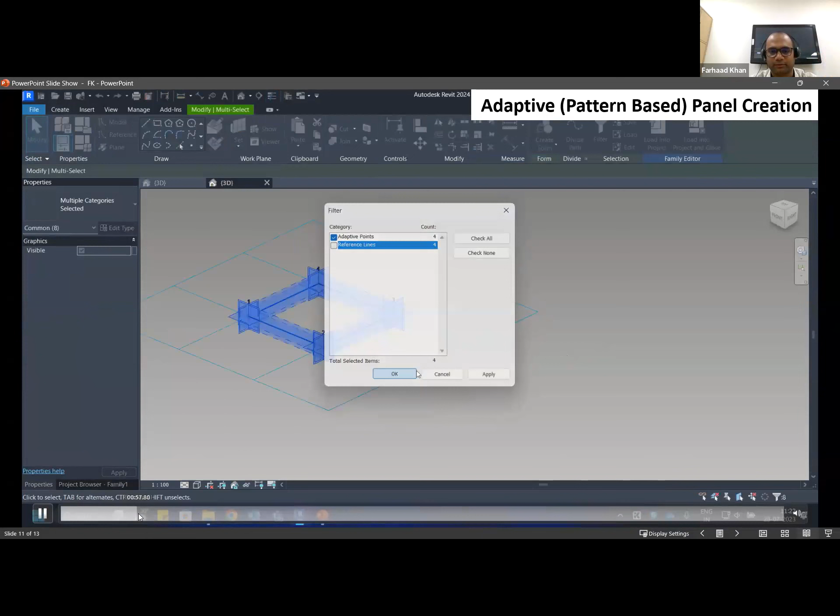So now we have divided the roof. So now we have to make one module and adapt it on the roof so that it runs all over the roof. So now we have to make that element. So for the element, we'll take another family, and we'll just make one module and adapt it all over the roof. So then the roofing structure will look similar to the Trichy airport.

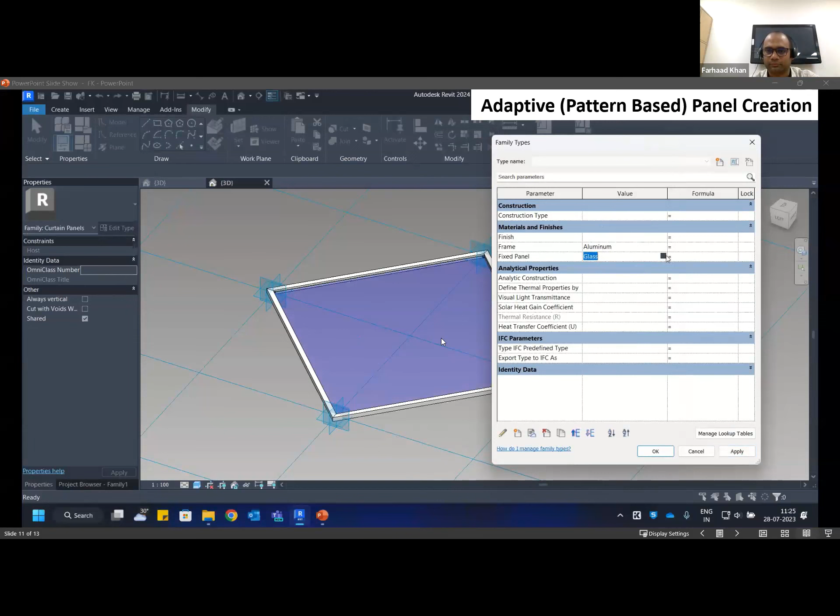So first we decide the shape, taking the same point elements. We can have multiple elements. So this is one module. So this module is partially open also. So we can make one parameter which will decide the opening of the panel so that the light can come in through those panels. So you can see the material we have changed to glass. We can select the material, then just quickly move forward.

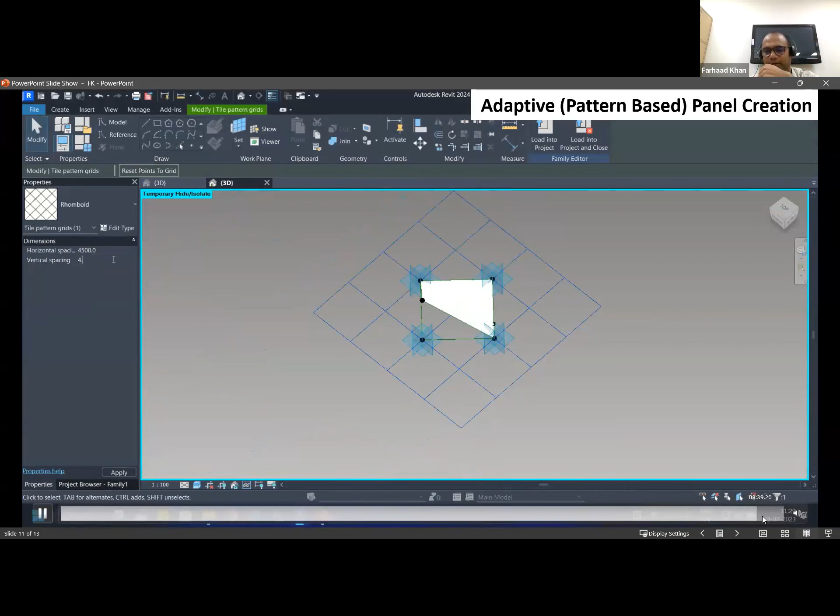And now how to open the panel. So we are making one more parameter, height. So now this will move according to whatever height we select. So you can see here that the opening is there, and now we can select the material. So now we can change the opening here from the formula. So height we can change to 500. So it can be closed or open. Now we have to put it on the roof.

So now this is the roof, and we have to put that panel. So we are going to import it as a family.

Oh, sorry, 1 second.

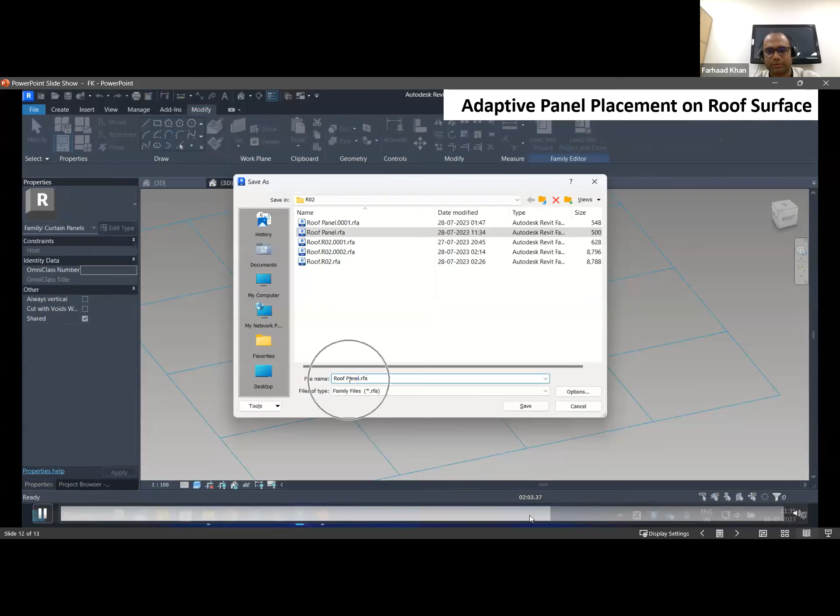So yeah. So we'll just save the roof panel. We are going to just import it. We'll just select the roof panel. It's a new family that has come in, and you can see now it will just adapt over the roof. So it's just loading, and you will just see this.

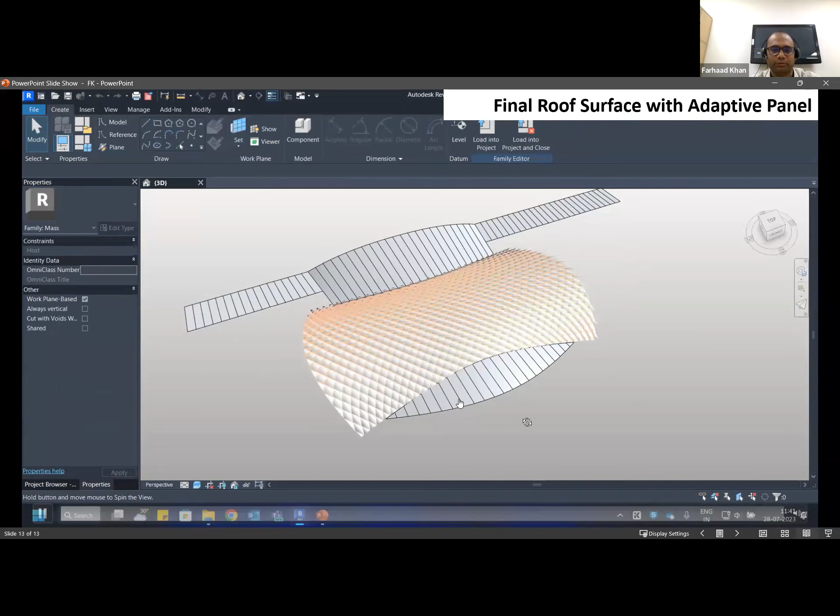Yeah, now you can see the change here. Now those small form modules have come up and adapted on the roof. So now we have the roof like we have on Trichy airport. So here it's the complete roof. Now you can see that it is adapted on the roofing structure, and we have the proper roofs.

You can see by zooming in. So we can also simulate the openings of different modules by the sun movement, like you saw in the Al Bahar Tower. Obviously, because of the time constraint, I have not added the Dynamo script. So we can control the panels by the sun movement using Dynamo, and when the sun moves, the panels can also move. So that will further make it more sustainable.

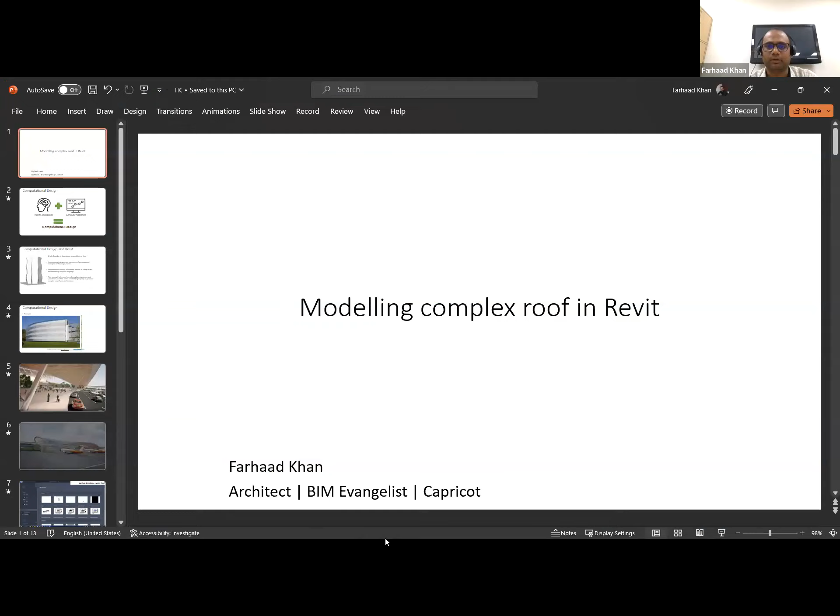Okay, so that was about modeling the complex roofs. So I just wanted to show you that it is very much possible in Revit and easily doable.

So I guess all the questions were already answered by all our panelists. But we can still take some questions. Anyone would like to elaborate further? Yes, please feel free to just unmute if you would like to answer the question. I'm sorry, did I miss anything, Farhaad? Maybe Farhaad, you can ask some questions which were asked.

So, Anand, there was one question for you: how was fireproofing in the steel structure achieved? So I have answered all the questions, but for the sake of doing it again, we had steel in two different forms. There was steel which was part of the composite steel structure in columns where there was concrete cladding. And wherever it was exposed and only under a false ceiling, we did intumescent paints. Intumescent paint structure.